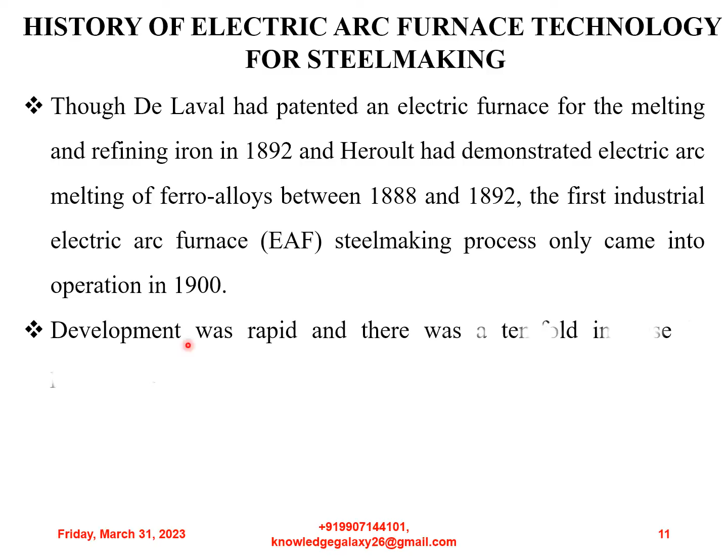Though De Laval had patented an electric furnace for melting and refining iron in 1892, and Heroult had demonstrated electric arc melting of ferroalloys between 1888 and 1892, the first industrial electric arc furnace, that is EAF, steel making process only came into operation in 1900. Development was rapid, and there was a tenfold increase in production from 1910 to 1920, with over 500,000 tons being produced in 1920, though this still represented only a very small proportion of the global steel production at that time.

Initially, EAF steelmaking was developed for producing special grades of steels using solid forms of feed such as scrap and ferroalloys. Solid materials were firstly melted through direct arc melting, refined through the addition of appropriate fluxes, and tapped for further processing.

Till the late 20th century, tap-to-tap times over 3 hours were common, and power usage was frequently well over 600 kilowatt-hour per ton, nearly twice the thermodynamic requirement. For much of the 20th century, EAF steelmaking was viewed as an expensive and slow process only suitable for high-value steels.

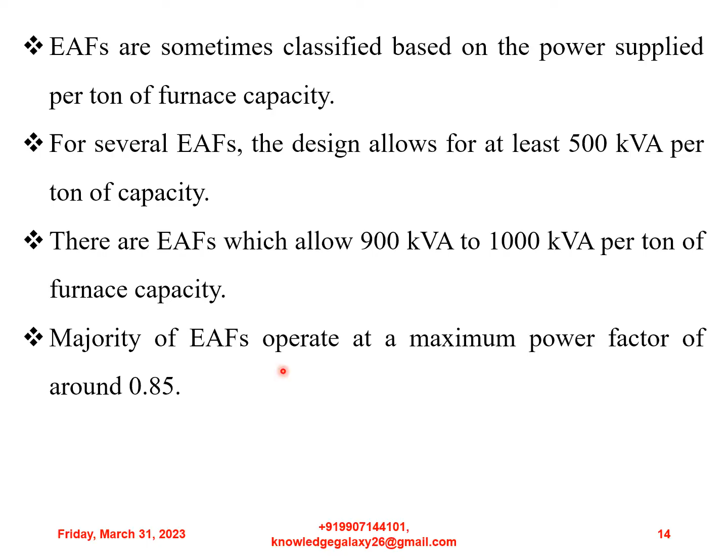So again, let's move on. EAFs are sometimes classified based on the power supplied per ton of furnace capacity. For several EAFs, the design allows for at least 500 kVA per ton of capacity. There are EAFs which allow 900 kVA to 1000 kVA per ton of furnace capacity. Majority of EAFs operate at a maximum power factor of around 0.85. Hence, the transformer ratings correspond to a maximum power input of around 0.75 to 0.85 megawatt per ton of furnace capacity.

The emerging new technology of EAF started in the beginning of the 20th century when wide-ranging generation of relatively cheap electric energy started at that time. First generation electric arc furnaces had a capacity between 1 ton and 15 tons only. Initially, the EAF had Bessemer or Thomas converters and Siemens Martin furnaces as strong competitors, but its niche was the production of special steels needing high temperature, ferroalloy melting, and long refining times.

Initially, for the bulk production of plain carbon steels, open hearth furnaces were less expensive because of their large size as well as the higher cost of electricity.

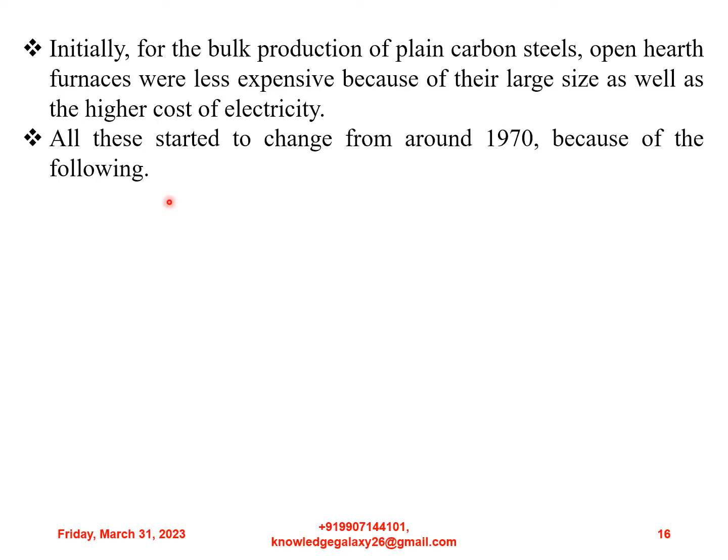All these started to change from around 1970 because of the following. First, while the cost of liquid fuels started increasing, electricity generation costs became lower and electricity became comparatively cheaper. Next, larger and higher power EAFs could be installed because of progress in electrical engineering and control systems.

Next, EAF steelmaking is intrinsically cleaner than open hearth steelmaking. Since EAF steelmaking is predominantly scrap-based, smaller plants with lower capital investments and faster attainment of rated capacity could be set up even compared to BF/BOF based plants—BF being blast furnace and BOF being basic oxygen furnace based plants. Therefore, electric arc furnaces started gradually replacing basic open hearths for producing plain carbon steels as well.

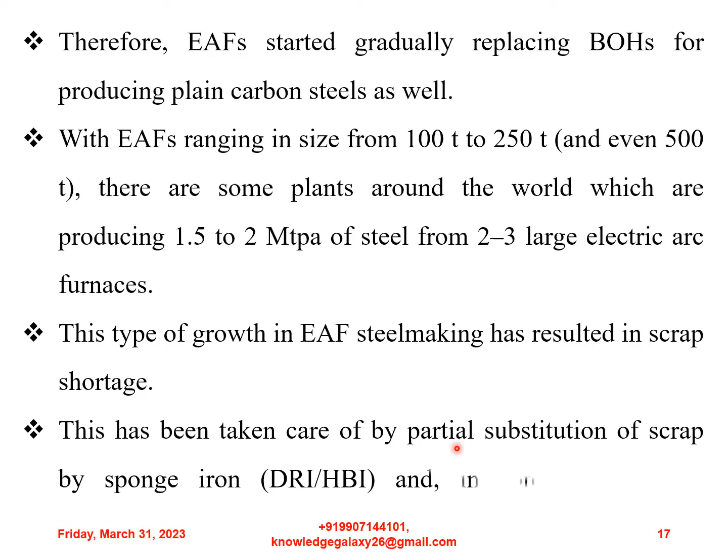With electric arc furnaces ranging in size from 100 ton to 250 ton and even 500 ton capacity, there are some plants around the world producing 1.5 to 2 million tons per annum of steel from 2 to 3 large electric arc furnaces. This type of growth in electric arc furnace steelmaking has resulted in scrap shortage. This has been taken care of by partial substitution of scrap by sponge iron, that is DRI or HBI—DRI being directly reduced iron and HBI being hot briquetted iron—and in some plants with additional charging of cold pig and hot metal.

Electric arc furnace based operations have gradually moved into production of steels which were traditionally made through the integrated route. The first of these areas was long products, that is reinforcement bars, merchant bars and wire rods. In the 1960s, with the advent of billet casting, the electric arc furnace occupied a new niche and became the melting unit of choice for the so-called mini mills, feeding billet casting machines for the production of long products.

This was followed by advances into heavy structural and plate products, and by 1985 a new niche for electric steelmaking began to be taken to the flat products area with the advancement of thin slab casting and direct rolling process.

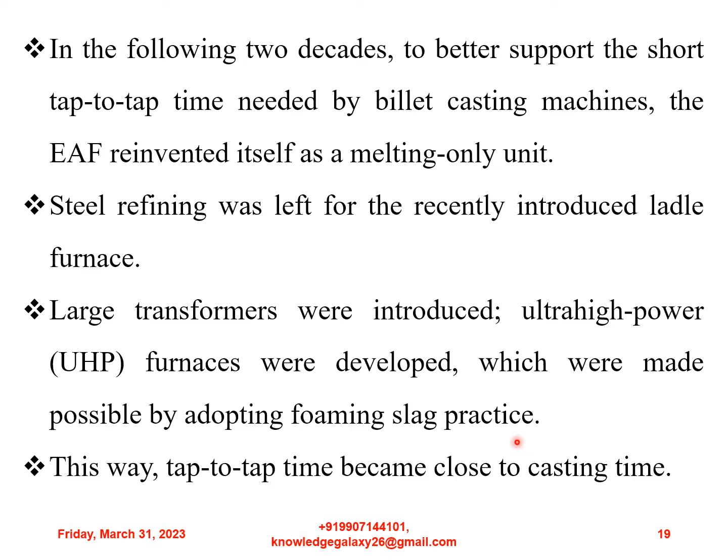In the following two decades, to better support the short tap-to-tap time needed by billet casting machines, the electric arc furnace reinvented itself as a melting-only unit. Steel refining was left for the recently introduced ladle furnace. Large transformers were introduced. Ultra-high power, that is UHP furnaces, were developed, which were made possible by adopting foaming slag practice. This way, tap-to-tap time became close to casting time.

Since the 1960s, the technology has undergone rapid development, moving from a boutique technology to the second largest steelmaking technology behind basic oxygen steelmaking, that is BOS technology. Since the late 20th century, production of steel by the electric arc furnace has grown considerably. There have been several reasons for this, but primarily they relate back to product cost and advances in technology.

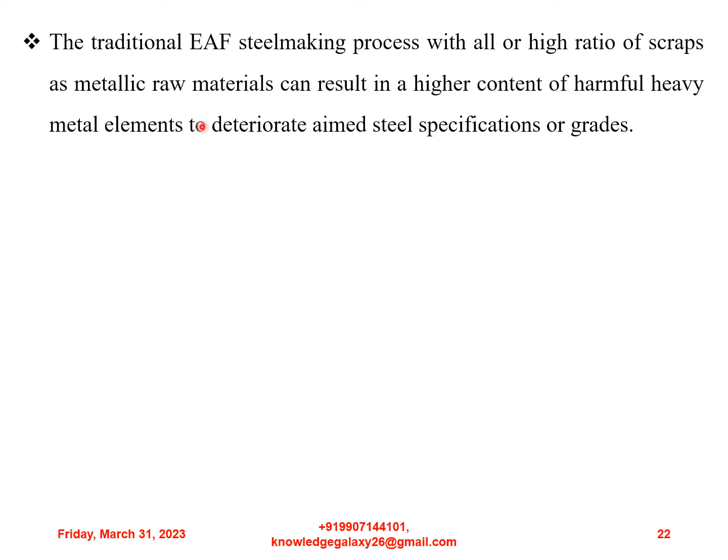Moving on, the traditional electric arc furnace steelmaking process with all or high ratio of scraps as metallic raw materials can result in a higher content of harmful heavy metal elements, deteriorating aimed steel specifications or grades.

Hence, the normal flow chart and organization of electric arc furnace steelmaking can be disturbed by charging excessive scraps with complex chemical compositions. It has been widely proposed that one of the effective measures to avoid and solve this problem is to increase hot metal charge ratio.

However, excessive charging of hot metal can lead to prolonging the tap-to-tap time of the electric arc furnace steelmaking process, since large carbon load from the excessively charged hot metal can overburden the decarbonization operation during the process.

As electric arc furnace steelmaking attempts to further displace steelmaking through the integrated route, several issues come into play, such as residual levels in the steel—essentially elements contained in the steel which are not removed during melting or refining—and dissolved gases, namely nitrogen, hydrogen, and oxygen in the steel. Both of these have a large effect on the quality of the steel and are to be controlled carefully if electric arc furnace steelmaking is to compete for the production of higher quality steels.

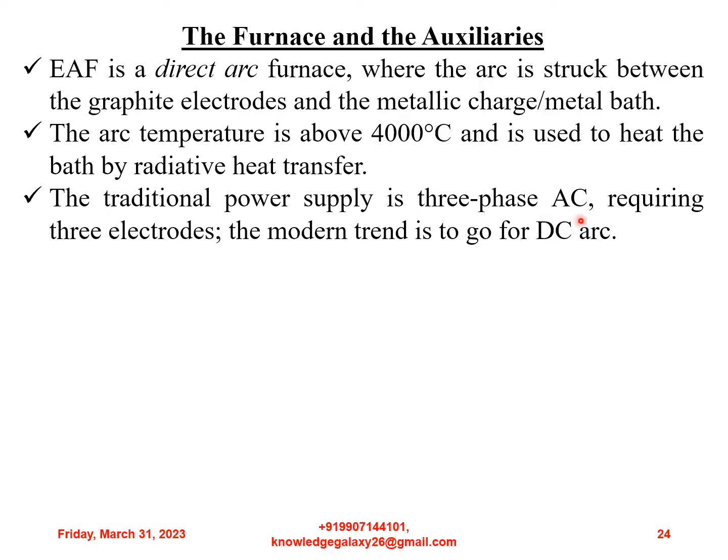Electric arc furnace is a direct arc furnace where the arc is struck between the graphite electrodes and the metallic charge or metal bath. The arc temperature is above 4000 degrees Celsius and is used to heat the bath by radiative heat transfer. The traditional power supply is three-phase AC requiring three electrodes. The modern trend is to go for DC arc.

The figure in the next slide depicts the typical cross section of a conventional electric arc furnace. So you can observe that picture.

Basic type electric arc furnaces are employed for steel making. Hence the inner lining of the hearth in such furnaces is burnt magnesite. Charging is done from the top, and during charging the electrodes are lifted up to allow the roof to be swung horizontally to one side, thus providing open access from the furnace top.

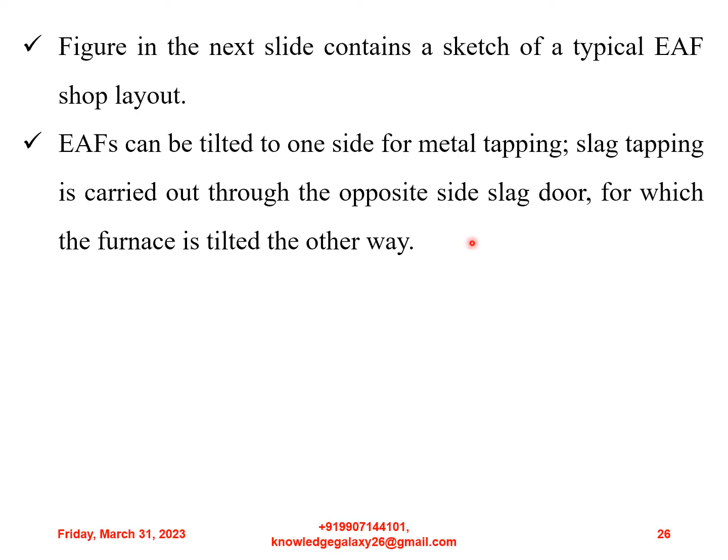I hope you have observed the cross section of an electric arc furnace shown in the previous slide. So now let's move on. The next slide contains a sketch of a typical electric arc furnace shop layout. Electric arc furnaces can be tilted to one side for metal tapping, and slag tapping is carried out through the opposite side slag door, for which the furnace is tilted the other way.

The electrodes get worn out and consumed during arcing, and before the length of an electrode becomes too small for operation, another electrode is joined to it at the top. In order to do this, each electrode has internal threading at the ends, and the threaded ends of the two electrodes are connected by a threaded graphite nipple.

Now let me describe the whole layout in detail. The furnace unit itself includes the following parts. First, furnace body consisting of the shell, the hearth, the walls, the spout, doors, etc. Next is gears for furnace body movement. Next comes arrangement for moving the roof. Next is electrodes with their holders and supports. Electrode lifting and lowering mechanism. Next is electrical equipments, that is transformer, cables, electrode control arrangements, etc.

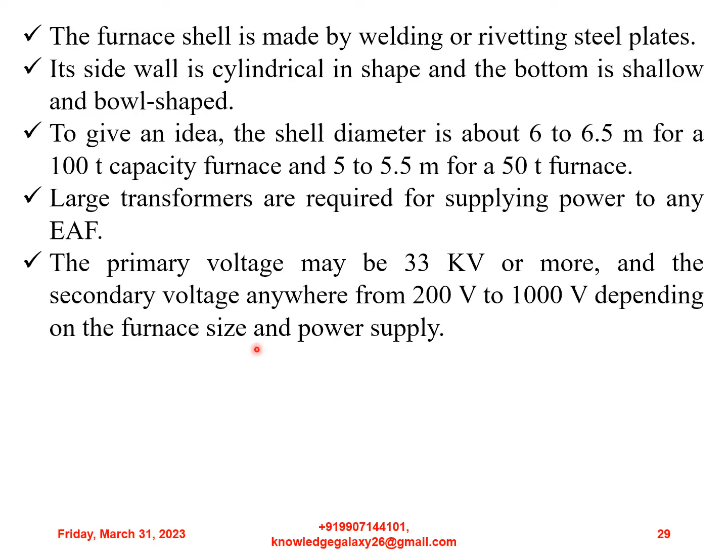Next, moving on. Let us keep the momentum going and continue the presentation, and discuss the conventional electric arc furnace steel making practice, how steel was made conventionally in electric arc furnace. As mentioned already, the process of electric arc furnace steel making is about 100 years old. Through decades of efforts till 1970, electric furnace steelmaking practice got significantly standardized.

This is what is denoted by the term conventional. It is practiced even now in smaller and relatively older units. Electric arc furnace steel making involves most of the stages in heat making in basic open hearth furnaces with the exception of the following. Hot metal is not used in conventional practice, my dear friends. I repeat, hot metal is not used in conventional practice.

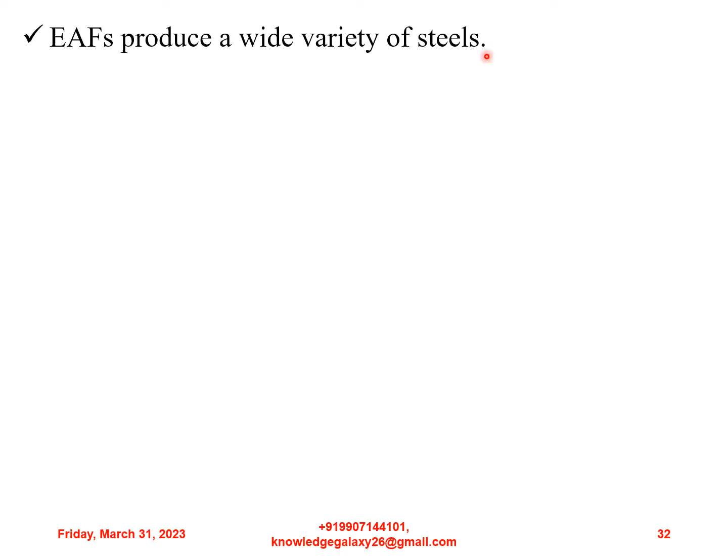Electric arc furnaces produce a wide variety of steels. Depending on the type of solid metallic charge and the grade of steel to be produced, the refining practice differs considerably. The type of refining employed may be broadly classified into the following.

First, oxidizing single slag practice. It is employed to produce tonnage grades of carbon and low alloy steels, as well as non-deoxidized, semi-deoxidized and deoxidized steels. The physical and chemical specifications are not very stringent, that is, the quality of steel is similar to what is attainable in open hearths using a basic oxidizing slag as the medium of refining.

Next comes double slag practice. In this case, after refining using an oxidizing slag, further refining is carried out under a reducing slag. So, double slag practice: after refining using an oxidizing slag, further refining is carried out under a reducing slag.

The reducing slag allows attainment of lower sulfur levels and also assists in higher alloy recovery after tapping. In this practice, the original oxidizing slag can be modified by the addition of reducing agents. However, it gives rise to danger of reversion of phosphorus from the slag back to metal.

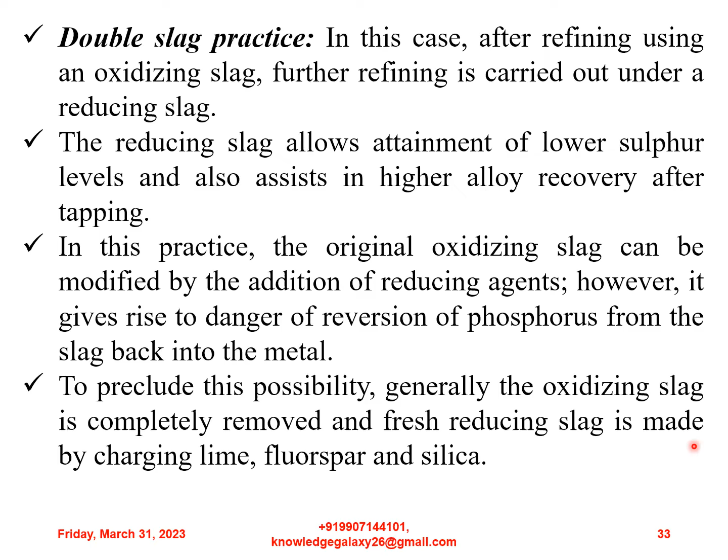To preclude this possibility, generally the oxidizing slag is completely removed and fresh reducing slag is made by charging lime, fluorspar and silica.

The reducing agent may be graphite or coke breeze. This type of slag is commonly referred to as carbide slag, since the carbon added reacts with CaO to form some amount of CaC2.

Carbide slags do not allow very low carbon contents to be attained in the bath. In such cases, ferrosilicon is used as the reducing agent instead of carbon.

At this stage, it is worth noting some salient differences in the metallurgical features of basic open hearth and electric arc furnace steelmaking. These are noted below.

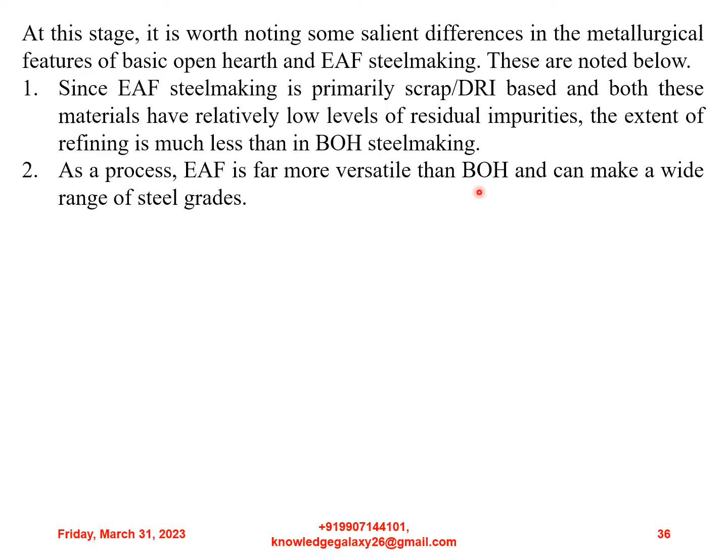First, since electric arc furnace steelmaking is primarily scrap or DRI based, and both these materials have relatively low levels of residual impurities, the extent of refining is much less than in basic open hearth steelmaking. As a process, electric arc furnace is far more versatile than basic open hearth and can make a wide range of steel grades.

Sorting out of scrap and choosing the proper scrap grade are important for electric arc furnace steel making. This is the heart of the steel making operation via electric arc furnace, since the extent of refining has to be managed accordingly. For this purpose, scrap may be classified into the following categories.

First is scrap containing elements that cannot be removed by oxidation during refining, such as copper, nickel, stannum, molybdenum, tungsten, etc. Next category is scrap containing partially oxidizable elements such as phosphorus, manganese, chromium, etc.

Next category is scrap containing completely oxidizable elements such as aluminium, silicon, titanium, vanadium, zirconium, etc. Next category is scraps containing volatile elements such as zinc, cadmium, plumbum, etc.

Now, scrap of type B and C can be tackled easily during refining, and type D scrap would require some special attention. However, type A scrap gives rise to problems like undesirable residuals in the final steel.

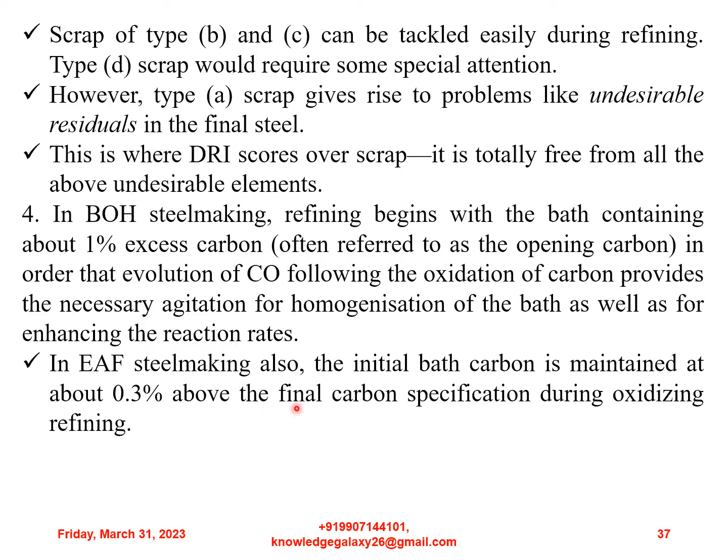In electric arc furnace steel making also, the initial bath carbon is maintained at about 0.3% above the final carbon specification during oxidizing refining. However, stirring is absent during refining under a reducing slag, and some other stirring technique, use of mechanical stirrers called rabbles, is required.

Now let us discuss about the advances in electric arc furnace steel making. Advances are the developments which have been done in the electric arc furnace steel making technology. So let us describe all of them in detail.

There have been several advances in electric arc furnace technology which have allowed the electric arc furnace to compete successfully with the integrated production route. Majority of these have dealt with increases in productivity leading to lower cost of steel production.

Present day electric arc furnaces can produce any type of steel grades which include the general purpose construction steel grade, the titanium niobium ultra low carbon steel for automotive body parts having a carbon specification of less than 0.0035% in order to optimize formability, the line pipe steel for gas distribution, which is a very demanding grade as the combination of high strength and high fracture toughness demands extremely low levels of impurities like phosphorus, sulfur, hydrogen, oxygen and nitrogen.

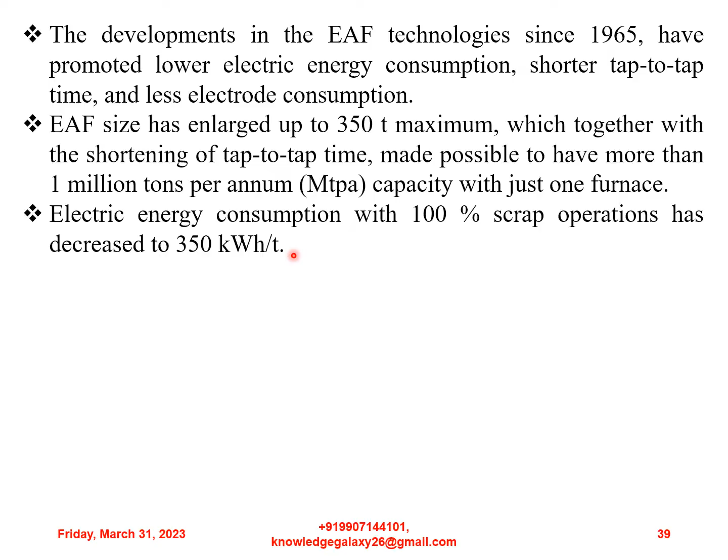Electric energy consumption with 100% scrap operations has decreased to 350 kWh per ton. Chemical energy increased at levels not far from those of basic oxygen steelmaking processes. Refractory consumption has fallen down because of the replacement by cooled roof and panels, foaming slag, and refractory quality improvement.

Power off time is now less than 10 minutes for the best operated furnaces. For a large number of electric arc furnaces, average electrode consumption is around 1.43 kilograms per ton.

The present day ultra high power electric arc furnace has several sub-processes which have contributed to its remarkable productivity and efficiency. The phenomena which occur in the furnace include: first, heating of the scrap by the oxy-fuel burners, melting of the scrap by the electric arcs, liquid slag formation.

Next comes oxygen and carbon injection for foaming of the slag. Next, movement of the scrap pieces during melting. Sixth one is oxygen lancing for scrap cutting and decarburization. Seventh is chemical reactions between slag and metal. And eighth one is post combustion of the CO, carbon monoxide, evolved from the reactions.

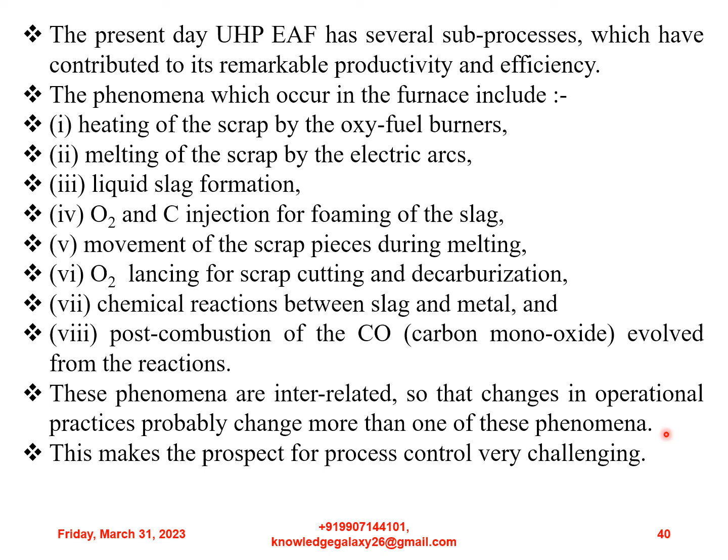These phenomena are interrelated, so that changes in operational practices probably change more than one of these phenomena. This makes the prospect for process control very challenging.

The shift towards electric arc furnace steel making has been accompanied by technical advances which have allowed large decreases in power requirements and increased productivity. Some of the major technical advances are: first, foaming slag practice, in which a foaming slag is used to bury the arc and reduce refractory damage and heat loss from the arc region.

Next is hot heel operation, in which liquid steel is left in the bottom of the furnace to assist in the melting of fresh solid feed entering the furnace.

Next is post combustion, in which CO generated during decarburization is burned through oxygen injection from lances inside the furnace, and the energy liberated is used either in heating the bath directly or preheating the incoming feed materials.

Fourth one is oxy-fuel burners, in which auxiliary burners are used to improve melting rates and to provide more even heat distribution throughout the furnace.

Fifth is preheating of scrap, in which a number of scrap preheating systems utilizing the heat associated with the exhaust gases have been developed, some based on batch bucket systems and others on continuous shaft systems.

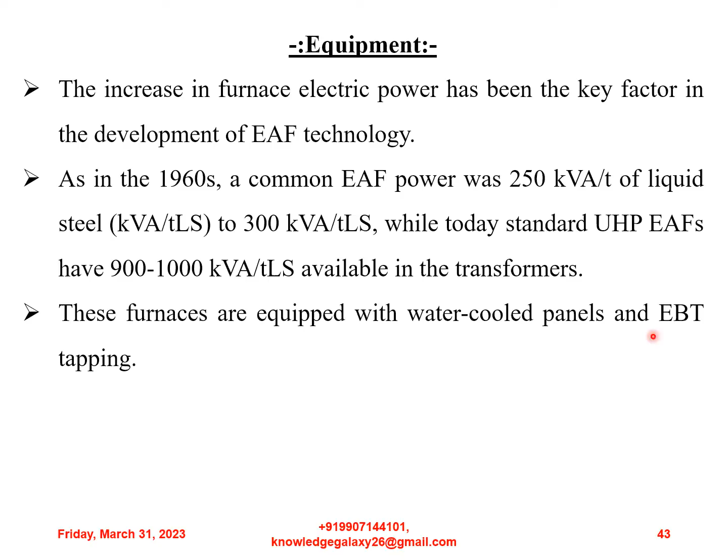These furnaces are equipped with water-cooled panels and EBT tapping. EBT is eccentric bottom tapping, which I will be discussing later. EBT stands for eccentric bottom tapping, a system of tapping which yields a uniform steel jet falling into the ladle with slag carryover controlled to a certain extent.

The present day electric arc furnace includes three water-cooled parts: roof, panels, and the exhaust gas duct. Although some heat is lost due to heat extraction by the cooling water, this design allows for less refractory consumption, since they replace refractory linings, and enables the use of high power.

At the time the panels were first introduced, some fears arose on safety risks, but after realizing the cost advantages, almost all electric arc furnaces adopted them. The panels can be made of steel or copper, which have much longer life, and with different designs like conventional, flip and turn, etc.

Recently, more attention has been paid to safety with water cooling: firstly, to detect, limit and avoid the possibility of water leakage, and secondly, to cut the need of repairing work in the hot furnace. Exhaust gas analysis, when hydrogen is included, is a useful tool to detect leakage.

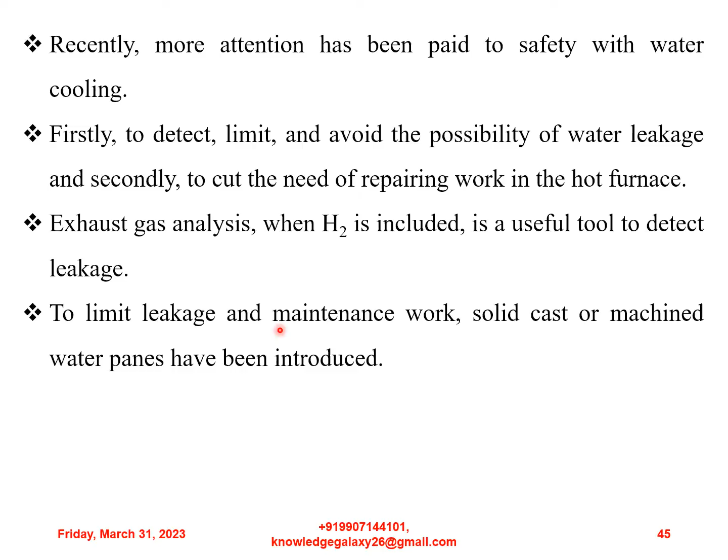To limit leakage and maintenance work, solid cast or machined water pans have been introduced. Split shell with spray-cooled upper shell means less risk, as non-pressurized water tends to penetrate less in case of leakage.

Today, electric arc furnace process is an essential part of steel making. Melting is the main task of the electric arc furnace process, and it is accomplished by energy supply which includes both electric power and chemical energy. The electric power is supplied by the graphite electrodes, which is the main energy supplier. Chemical energy is supplied through several sources, mainly including oxy-fuel burners and oxygen injection.

At first glance, the basic processes of the electric arc furnace appear quite straightforward, consisting of simply providing enough electrical energy to heat and melt the steel scrap.

However, the whole process takes place under conditions of extreme temperature, which complicate maintenance of the furnace and the correction of any problems. For example, to preserve the refractory lining in the furnace, water cooling panels are built into the furnace walls. Without careful control, these can overheat and the process temperature has to be adjusted accordingly.

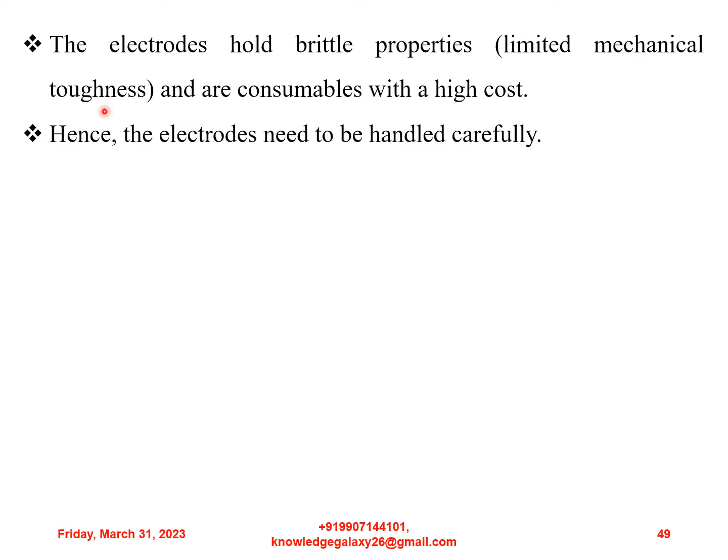The electrodes hold brittle properties, that is limited mechanical toughness, and are consumables with a high cost. Hence, the electrodes need to be handled very carefully.

If the furnace is filled with an excessive amount of coarse scrap, the electrodes need to be lowered very carefully in order to avoid expensive breakages. The electrodes progressively wear during heating and melting, and measures have to be taken to avoid shock to the electrodes.

These are examples of some of the several events which can arise during the electric arc furnace process. I hope everything so far is clear to you all.

Moving on, conventional electric arc furnaces today have 30 to 50% of their energy requirements met by chemical energy, and it appears that scrap melting is rather flexible in respect to where the energy comes from.

This is a distinct advantage of electric arc furnace steel making for several reasons. This has led equipment manufacturers to develop a number of new furnaces which have improved energy efficiency and/or flexibility.

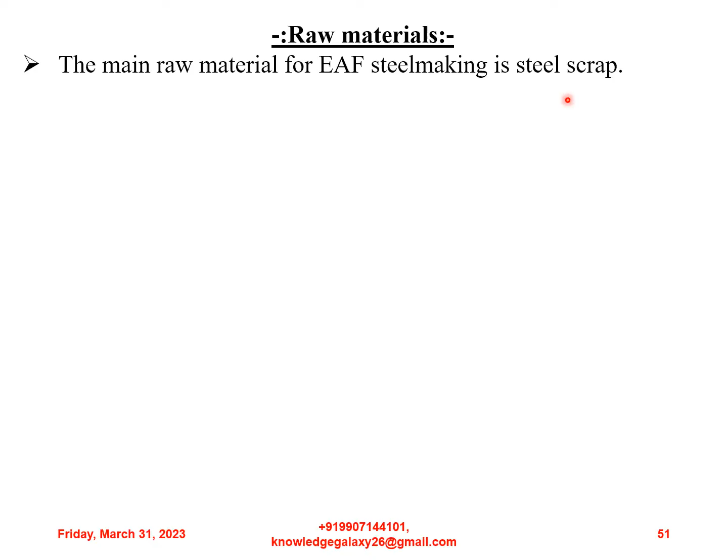Now let us discuss the raw materials used in electric arc furnace steel making technology. The main raw material for electric arc furnace steel making is steel scrap. Today, the electric arc furnace is the most common way to recycle steel from scrap.

There is a broad variety of steel scrap, both in terms of composition, from plain carbon steels through to highly alloyed tool steels, and geometry, from finely shredded sheet through to large beams. By melting the scraps in the electric arc furnace with the help of electrodes and an electric current, new functional steel can be produced from old products.

Instead of deploying ore-based raw material resources, basic steel elements and valuable alloy steels can be reused, which is beneficial from both an economic and environmental point of view.

Scrap is energy intensive and a valuable commodity, coming primarily from three main sources: first, reclaimed or obsolete scrap, obtained from old cars, demolished buildings, discarded machinery, and domestic objects. Second, industrial or prompt scrap. Third, revert scrap, also known as internal or home scrap, generated within steel making and forming processes, such as crop ends from rolling operations and metallic losses in slag.

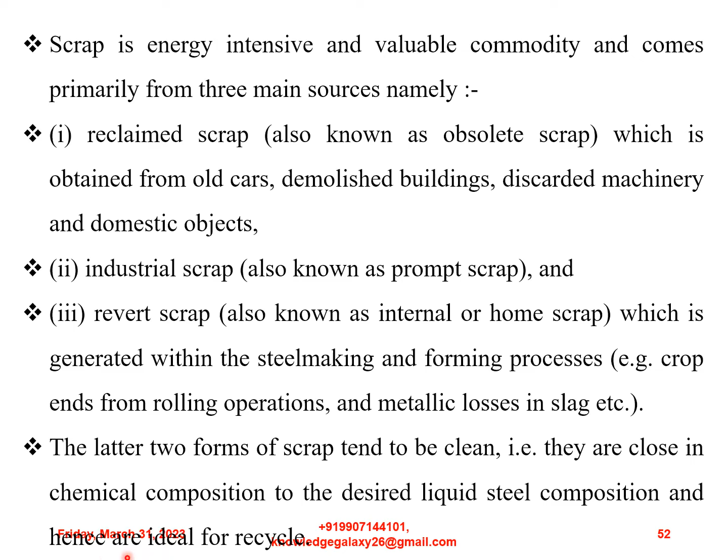The latter two forms of scrap tend to be clean, that is, close in chemical composition to the desired liquid steel composition, and hence are ideal for recycling.

Reclaimed or obsolete scrap frequently has a quite variable composition and often contains contaminants undesirable for steel making. Levels of residual elements such as chromium, molybdenum, copper, stannum, and nickel are high in obsolete scrap and can affect casting operations and product quality if not diluted.

Hence, a production shop needing very low residual levels in steel is forced to use higher quality prompt scrap, but at much higher cost. The alternative is to use a combination of contaminated obsolete scrap along with what are normally referred to as clean iron units or virgin iron units.

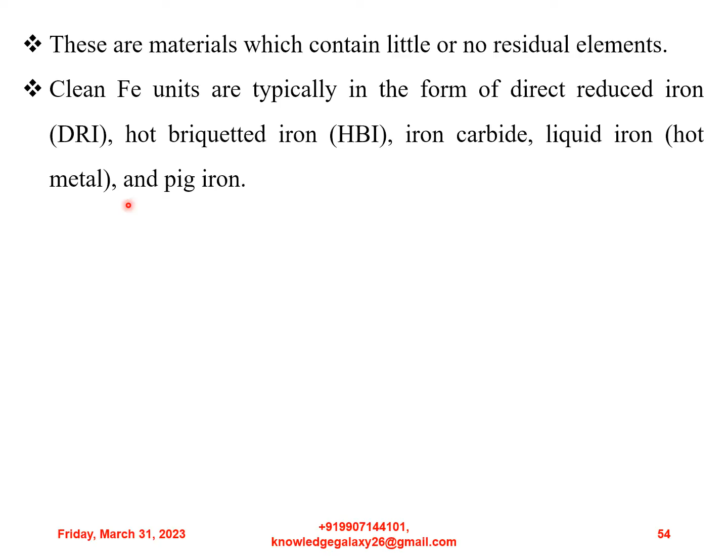These are materials which contain little or no residual elements. Clean iron units are typically in the form of direct reduced iron (DRI), hot briquetted iron (HBI), iron carbide, liquid iron, hot metal, and pig iron. It is possible to use lower grade scrap containing residual elements if it is blended with clean iron units so that the resulting residual levels in the steel after melting meet requirements for flat rolled products.

Obsolete scrap is much more readily available than prompt scrap, and hence the demand for clean iron units is always there.

There are electric arc furnaces in which 100% steel scrap is the most common charge. The situation is not the same in all electric arc furnaces, in which alternative materials like DRI, HBI, hot metal and pig iron take part in the charge. Worldwide, scrap covers around 75% of the metallics for electric arc furnaces, while DRI and HBI cover around 15%, and the balance is covered by hot metal and pig iron.

It is well known that DRI melting consumes more electric energy than scrap. This is an important aspect. This has to do with the presence of acid gangue in the iron ore, which carries into the DRI and then has to be neutralized by lime addition, resulting in an increased amount of slag compared with conventional melting of scrap.

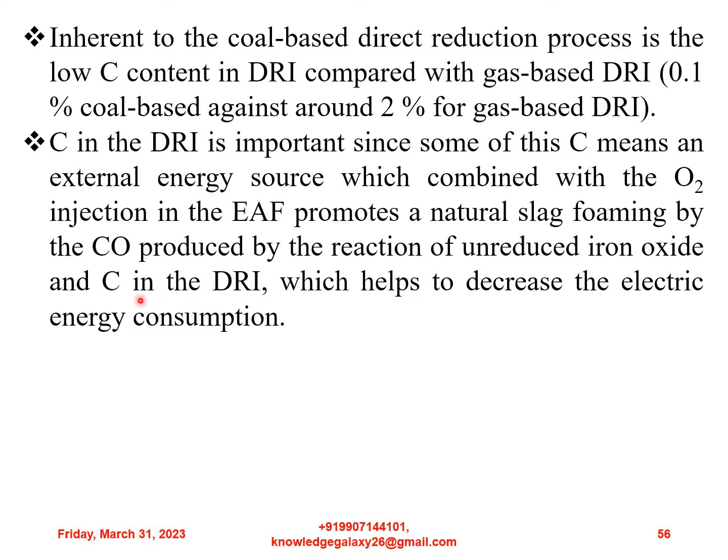Inherent to the coal-based direct reduction process is the low carbon content in DRI compared with gas-based DRI: about 0.1% for coal-based against around 2% for gas-based DRI. Carbon in the DRI is important since this carbon acts as an external energy source, which combined with oxygen injection in the electric arc furnace promotes natural slag foaming by the CO produced from the reaction of unreduced iron oxide and carbon in the DRI, helping to decrease electric energy consumption.

In electric arc furnaces where the charge consists of 100% DRI or HBI, charging is done through the fifth hole. Charging a high proportion of hot metal or pig iron in the electric arc furnace is practiced in some electric arc furnaces.

In addition to classification of scrap into the above three groups, scrap is also classified based on its physical size, its source, and the way in which it is prepared. For example, the categories normally used are number 1 bundles, number 1 factory bundles, number 1 shredded, number 1 heavy melt, number 2 heavy melt, number 2 bundles, number 2 shredded, busheling, turnings, shredded auto, structural, plate 1 meter, structural plate 1.5 meter, rail crops, and rail wheels, etc.

In addition to residual elements contained in the scrap, there are also several other undesirable components including oil, grease, paint, coatings, zinc coatings, water, oxidized material and dirt. The lower the grade of scrap, the more likely it is to contain higher quantities of these materials. As a result, this scrap can be cheaper, but the yield of liquid steel can be considerably lower than that achieved when using a higher grade scrap. In addition, these undesirable components can result in higher energy requirements and environmental problems.

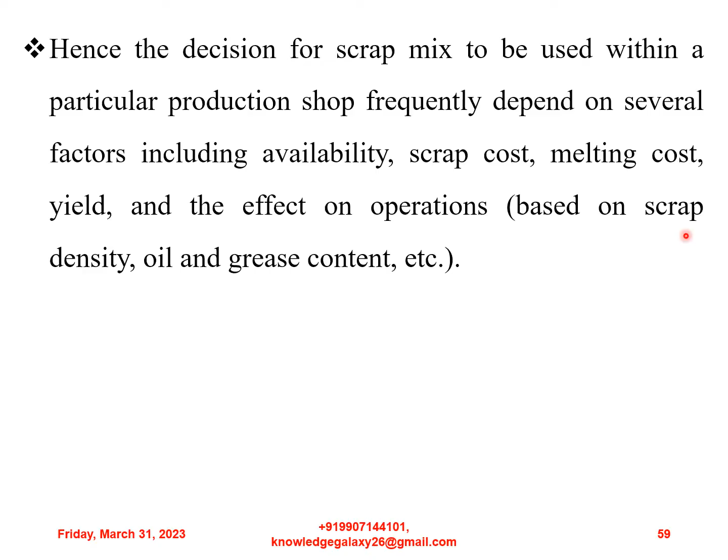Hence, the decision on the scrap mix to be used within a particular production shop frequently depends on several factors including availability, scrap cost, melting cost, yield, and the effect on operations based on scrap density, oil and grease content, etc. In practice, the majority of production shops buy several different types of scrap and blend them to get the most desirable effects for electric arc furnace operations.

Carbon is necessary for the production of steel. Carbon is one of the key elements which give different steel grades their properties. Carbon is also important in steel making refining operations and can contribute a sizable quantity of the energy required during the steel making process.

In basic oxygen steel making processes, carbon is present in the hot metal which is produced in the blast furnace. In electric arc furnace steel making, some carbon is available in the scrap feed, in DRI, HBI or other alternative iron furnace feeds. The quantity of carbon contained in these electric arc furnace feeds is normally considerably lower than that contained in the hot metal, and hence some additional carbon needs to be charged to the electric arc furnace.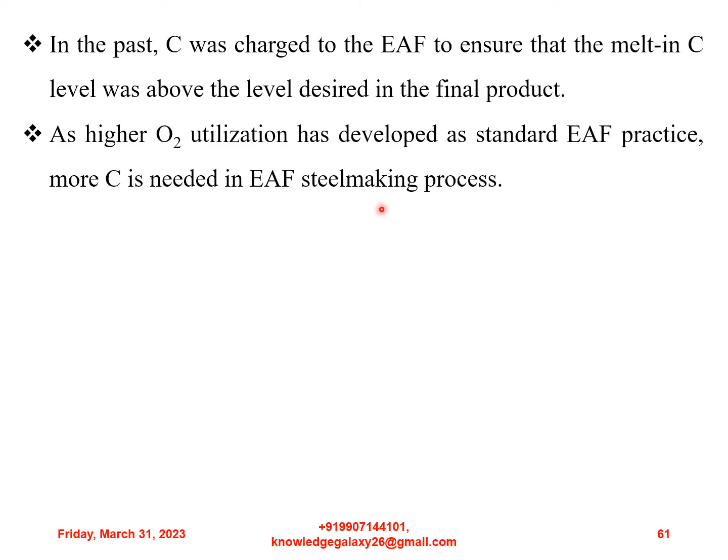In the past, carbon was charged to the electric arc furnace to ensure that the melt-in carbon levels were above the level desired in the final product. As higher oxygen utilization has developed as standard electric arc furnace practice, more carbon is needed in electric arc furnace steel making process. The reaction of carbon with oxygen within the bath to produce CO results in a considerable energy input to the process and has led to substantial reductions in electrical power consumption.

The generation of CO within the bath is also key to achieving low concentrations of dissolved gases, that is nitrogen and hydrogen, in the steel, as these are flushed out with the CO. In addition, oxide inclusions are flushed from the steel into the slag.

In oxygen injection operations, some iron is oxidized to FeO, that is ferrous oxide, and goes to the slag. Oxy-fuel burner operations also result in some scrap oxidation, and this also goes to the slag once the scrap melts in. Dissolved carbon in the steel reacts with FeO at the slag or bath interface to produce CO and recover iron units to the bath.

The quantity of charged carbon needed is dependent on several factors, which includes: first, carbon content of scrap feed; next, projected oxygen consumption; next, desired carbon at tapping; and fourth, the economics of iron yield compared with carbon cost. In general, the quantity needed corresponds to a C by O2 balance, as the furnace operator tries to maximize the iron yield.

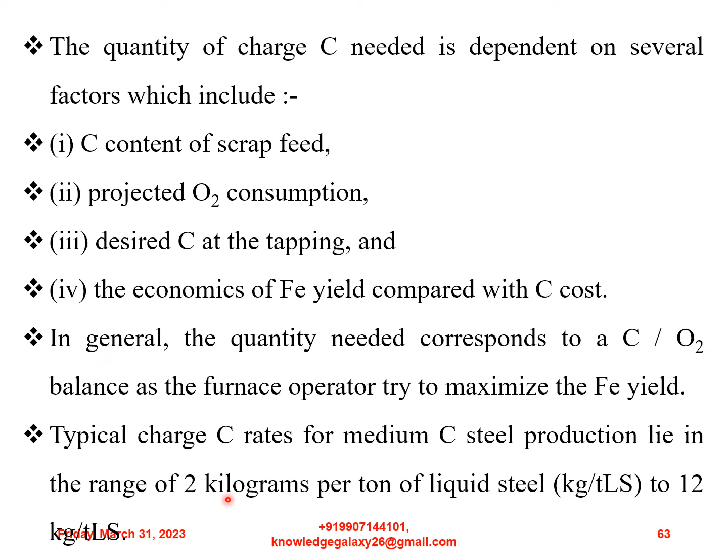The three types of carbonaceous materials which are normally used as charged carbon are: first, anthracite coal; second, metallurgical coke; and third, green petroleum coke.

Anthracite coal typically has moisture content of 3% to 8%, ash content of 11% to 18%, and sulfur content of 0.4% to 0.7%. The high variation in ash content translates into wide variations in fixed carbon content, and hence for use in electric arc furnace, the ash content is to be kept to a minimum. The ash consists primarily of silica, that is SiO2.

Hence, increased ash input to the electric arc furnace needs additional lime addition in order to maintain the desired basicity ratio in the slag. The best grades of anthracite coal have fixed carbon contents of 87 to 89%. Low grade anthracite coals can have fixed carbon levels as low as 50%.

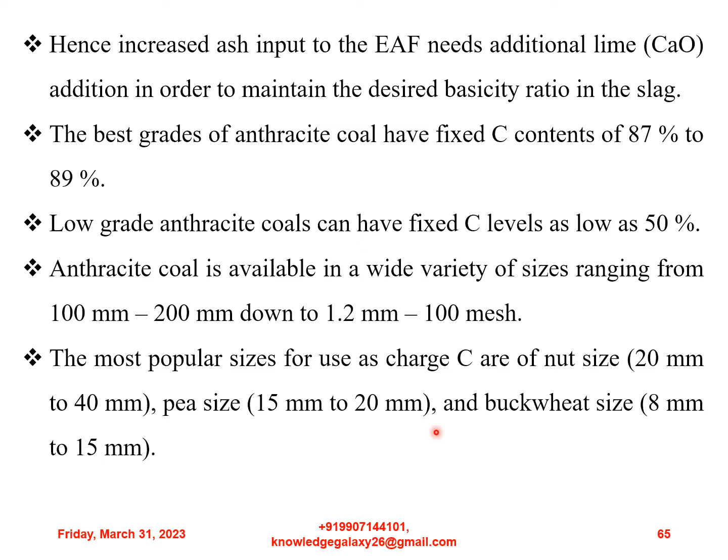Anthracite coal is available in a wide variety of sizes ranging from 100 mm to 200 mm down to 1.2 mm to 100 mesh. The most popular sizes for use as charged carbon are nut size, that is 20 mm to 40 mm, pea size 15 mm to 20 mm, and buckwheat size, that is 8 mm to 15 mm.

Metallurgical coke is produced primarily in integrated steel plants and is used in the blast furnace. However, some coke is used as charged carbon in electric arc furnace. Normally, metallurgical coke has a composition consisting of moisture content 1 to 2%, volatile matters 1 to 2%, ash content 9 to 12%, fixed carbon content 86 to 88%, and sulfur content 0.88 to 1.2%.

Normally, coke breeze with a size of -10 mm is used as charged carbon. Coarser materials can be used but has higher cost.

Green petroleum coke is a byproduct of crude oil processing. Its properties and composition vary considerably and are dependent on the crude oil feedstock from which it is derived. Several coking processes are used in commercial operation and these produce considerably different types of petroleum coke.

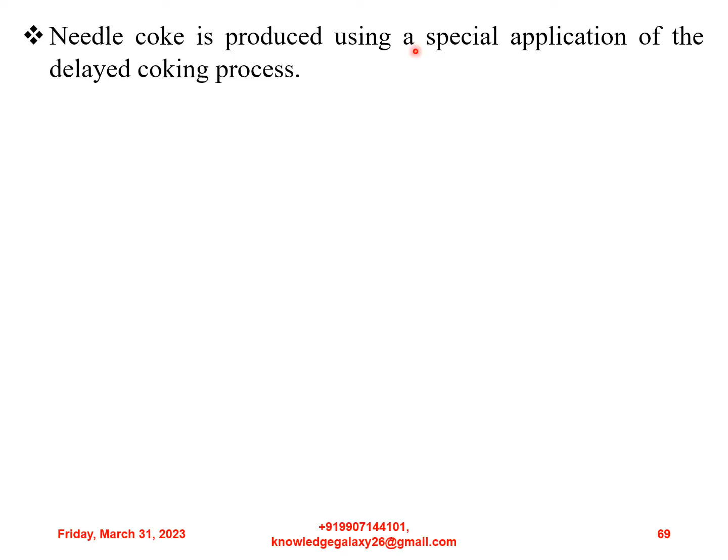Needle coke is produced using a special application of the delayed coking process. It is made from high-grade feedstocks and is the prime ingredient for the production of carbon and graphite electrodes. This material is normally very expensive to be used as charged carbon in electric arc furnaces.

Shot coke is a hard, pebble-like material resulting from delayed coking operation under conditions which minimize coke byproduct generation. It is normally used as a fuel and is cost competitive as charged carbon.

Fluid coke is produced in a fluid coking process by spraying the residue onto hot coke particles. It is normally high in sulfur content and is used in anode baking furnaces. It can also be used as a recarburizer if it is calcined.

So gentlemen, I hope we are going so far so good and moving ahead. Let us now discuss the operation of electric arc furnace.

The electric arc furnace is a batch melting process which produces batches of liquid steel known as heats. The tap-to-tap cycle of the electric arc furnace is made up of several steps consisting of furnace charging, melting, refining, deslagging, tapping, and last but not least, furnace turnaround.

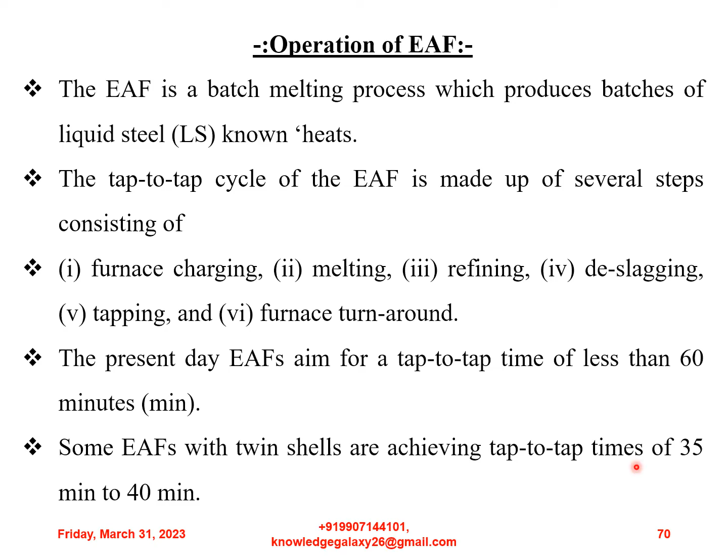The present day electric arc furnaces aim for a tap-to-tap time of less than 60 minutes. Some electric arc furnaces with twin shells are achieving tap-to-tap times of 35 to 40 minutes.

Today, a large number of electric arc furnaces operate with a condition called hot heel, meaning that almost 15% to 20% of metal from the previous heat remains at the bottom of the furnace after tapping. Hot heel increases productivity by allowing use of higher electric power since it decreases the possibility of damaging refractory by powerful arcs, and it also affects the melting rate of the scrap.

Furnace charging: the first step in the production of any heat is to select the grade of steel to be made. Normally, a schedule is developed prior to each production shift. Hence, the operators, normally called the melters, know in advance the schedule for their shift. The scrap yard operator prepares buckets of scrap according to the needs of the electric arc furnace operator.

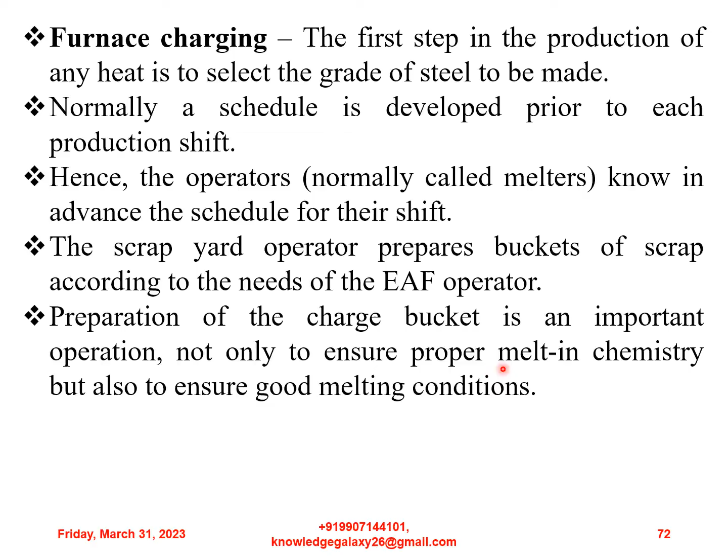Preparation of the charge bucket is an important operation, not only to ensure proper melt-in chemistry but also to ensure good melting conditions. The scrap is to be layered in the bucket according to size and density to promote the rapid formation of a liquid pool of steel in the hearth, while providing protection for the side walls and roof from electric arc radiation.

Other considerations include minimization of scrap cavings, which can break electrodes, and ensuring that large heavy pieces of scrap do not lie directly in front of burner ports, which results in blowback of the flame onto the water-cooled panels. The charge can include lime and carbon, or these can be injected into the furnace during the heat. Many operators add some lime and carbon in the scrap bucket and supplement this with injection.

The first step in any tap-to-tap cycle is charging of the scrap in the electric arc furnace. The roof and electrodes are raised and swung to the side of the furnace to allow the scrap charging crane to move a full bucket of scrap into place over the furnace.

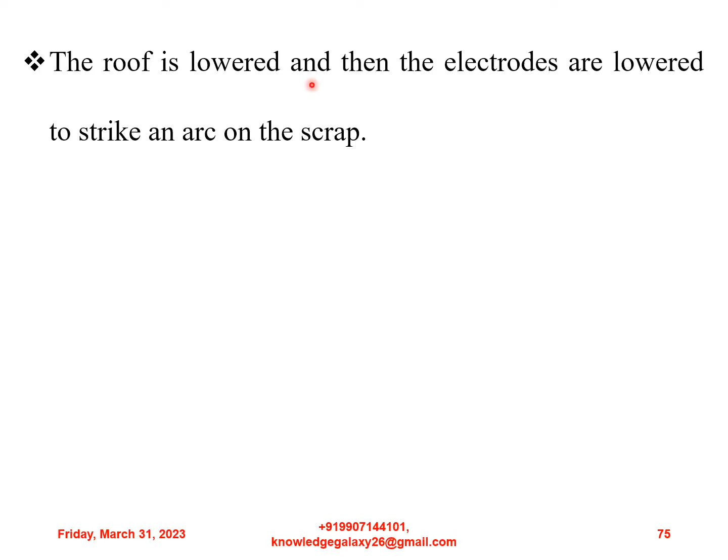The roof is lowered and then the electrodes are lowered to strike an arc on the scrap. This commences the melting portion of the cycle. The number of charge buckets of scrap needed to produce a heat of steel is dependent primarily on the volume of the furnace and the scrap density.

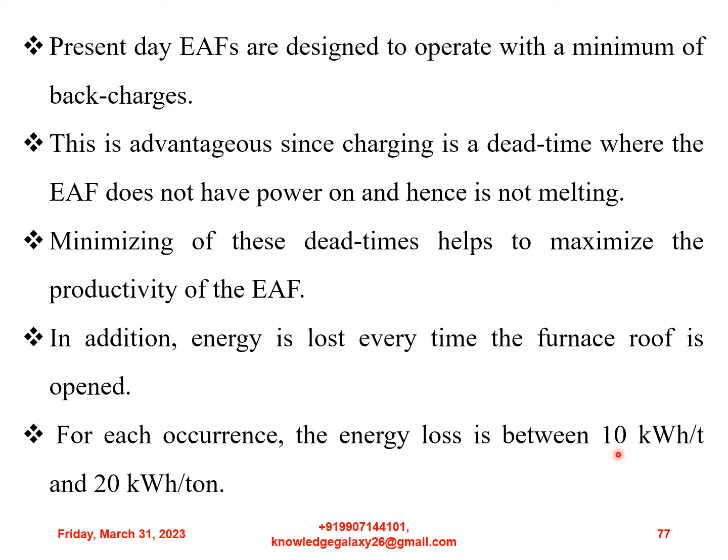In addition, energy is lost every time the furnace roof is opened. For each occurrence, the energy loss is between 10 kWh per ton to 20 kWh per ton. Majority of electric arc furnace operators aim for 2 to 3 buckets of scrap per heat and attempt to blend the scrap for meeting this requirement. Some operations achieve a single bucket charge also. Continuous charging operations such as Consteel and the Fuchs shaft furnace eliminate the charging cycle.

Now let us come to the next step, that is melting. The melting period is the heart of electric arc furnace operations. The electric arc furnace has evolved into highly efficient melting equipment, and present day designs are focused on maximizing the melting capacity of the electric arc furnaces.

The heat needed to melt steel scrap is provided by electric arcs created between the electrodes and the scrap in the furnace. The electrical power of normal electric arc furnaces lies in the range of 50 megawatt to 120 megawatt depending on the size of the furnace. Melting of the scrap occurs at a temperature range of 1500 to 1550 degrees Celsius depending upon the composition of the steel scrap.

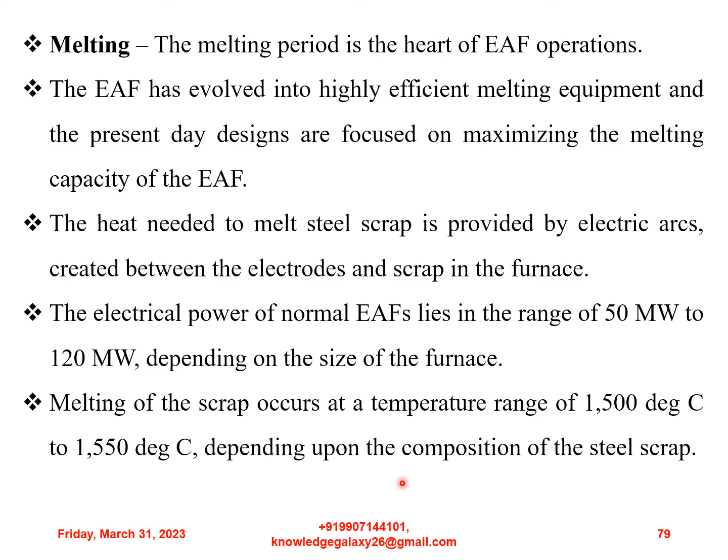Melting is accomplished by supplying energy to the furnace interior. This energy can be electrical or chemical. Electrical energy is supplied through the graphite electrodes and is normally the largest contributor in melting operations.

Initially, an intermediate voltage tap is selected until the electrodes bore into the scrap. For accelerating the boring, normally light scrap is placed on top of the charge. Around 15% of the scrap charge is melted during the initial boring period.

After a few minutes, the electrodes have penetrated the scrap sufficiently so that a long arc high voltage tap can be used without fear of radiation damage to the roof. The long arc maximizes the transfer of power to the scrap, and a liquid pool of metal is formed in the furnace hearth.

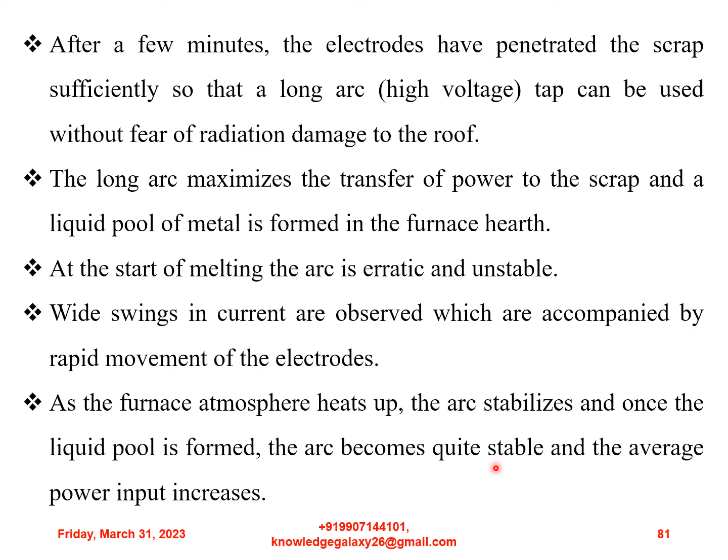At the start of melting, the arc is erratic and unstable. Wide swings in current are observed, which are accompanied by rapid movement of the electrodes. As the furnace atmosphere heats up, the arc stabilizes, and once the liquid pool is formed, the arc becomes quite stable and the average power input increases.

Although ultra-high power furnaces are used, fast melting by using only electric power is difficult and not the most economic practice either. Importing extra energy and assisting melting technique can greatly accelerate scrap melting and bring economic benefits. Accordingly, the present state of the art in electric arc furnace steel making is to use as much as possible chemical energy besides electric energy to accommodate tap to tap times to the pace of the downstream continuous casting process.

Chemical energy is to be supplied through several sources including oxy-fuel burners and oxygen lances. In the oxy-fuel burners, fuel gas is burned using oxygen or a blend of oxygen and air. Heat is transferred to the scrap by flame radiation and convection by the hot products of combustion. Heat is transferred within the scrap by conduction. Large pieces of scrap take longer to melt into the bath than smaller pieces.

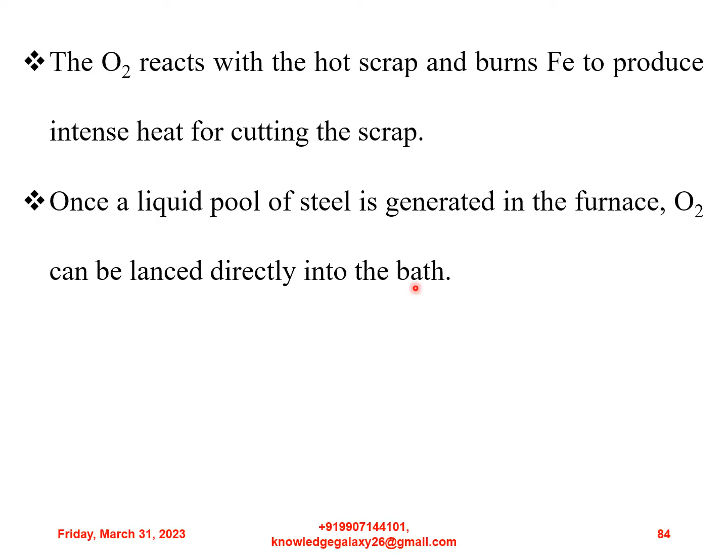Once a liquid pool of steel is generated in the furnace, oxygen can be lanced directly into the bath. This oxygen reacts with several components in the bath which include carbon, iron, aluminium, silicon, manganese and phosphorus. All of these reactions are exothermic in nature, that is, they generate heat and supply additional energy to aid in the melting of the scrap. The metallic oxides which are formed end up in the slag.

The reaction of oxygen with carbon in the bath produces CO, that is carbon monoxide, which either burns in the furnace if there is sufficient oxygen, and or is exhausted through the direct evacuation system where it is burned and conveyed to the pollution control system.

Once enough scrap has been melted to accommodate the second charge, the charging process is repeated. Once the final scrap charge is melted, the furnace sidewalls are exposed to intense radiation from the arc.

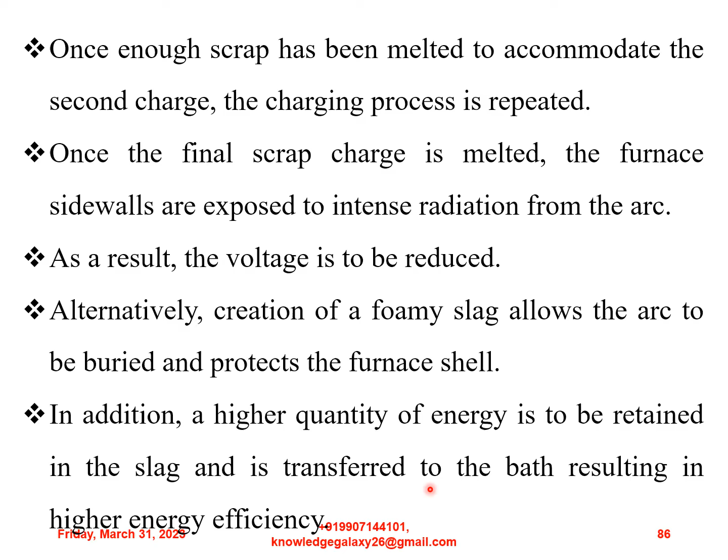As a result, the voltage is to be reduced. Alternatively, creation of a foamy slag allows the arc to be buried and protects the furnace shell. In addition, a higher quantity of energy is retained in the slag and is transferred to the bath, resulting in higher energy efficiency.

One of the most perplexing aspects about scrap is the way it moves during the melting process, and this causes operational problems such as cave-ins in which the scrap suddenly collapses onto the electrodes. These events disrupt the electrical operation, necessitating the rising of the electrodes, or in extreme cases, precipitating breakage of the electrodes.

Further, the solid scrap is introduced into a liquid steel pool when the charge is dropped into the liquid heel, and also when scrap starts to cave in to the pool which is formed by the arcs during the melting process.

Electric arc furnace operators frequently talk about icebergs or steel bergs that form by the bridging of several pieces of scrap, which can take longer to melt than the individual pieces. However, it is difficult to understand the contributing factors to this problem.

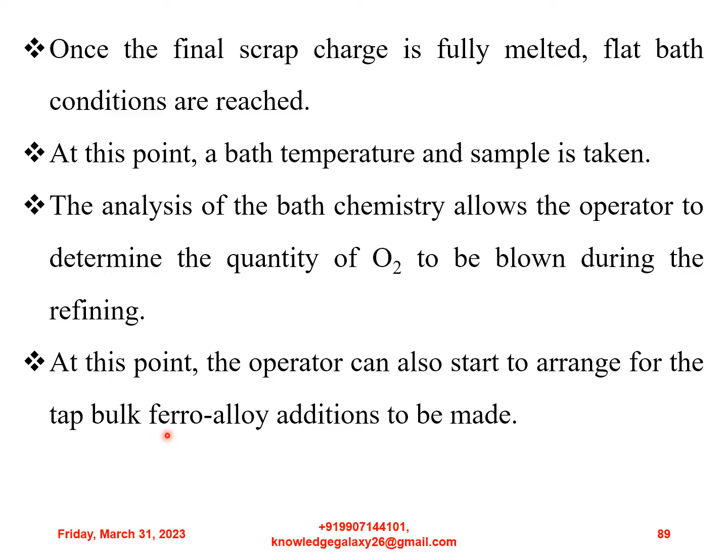Once the final scrap charge is fully melted, flat bath conditions are reached. At this point, a bath temperature and sample is taken. The analysis of the bath chemistry allows the operator to determine the quantity of oxygen to be blown during the refining. At this point, the operator can also start to arrange for the tap bulk ferroalloy additions to be made. These quantities are finalized after the refining period.

Now let us discuss the next step, which is refining. After the scrap has been melted, the temperature is normally increased so that refining reactions can be carried out. Oxygen and carbon can be injected into the steel phase and slag phase respectively. That means oxygen to steel phase and carbon to slag phase.

However, the reactions can also create products which are detrimental to the steel quality and which therefore need to be handled carefully. To do that, a slag is formed with the help of slag forming agents such as lime, calcined dolomite and fluorspar.

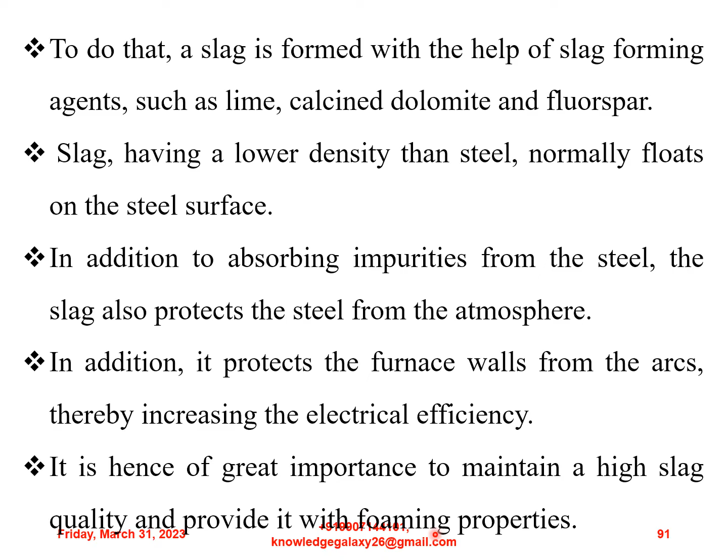Slag, having a lower density than steel, normally floats on the steel surface. In addition to absorbing impurities from the steel, the slag also protects the steel from the atmosphere. So these are the major advantages and functions of slag in steel making. In addition, it protects the furnace walls from the arcs, thereby increasing the electrical efficiency. It is hence of great importance to maintain a high slag quality and provide it with foaming properties.

Slag properties like viscosity, sulfur capacity and phosphorus capacity vary with composition and temperature. One of the main tasks during the refining operation is to maintain adequate slag properties by adding slag forming agents such as lime, calcined dolomite and/or fluorspar.

That is why you might have probably heard that the best steel maker is the best slag maker. So my dear friends, do concentrate on making the best possible slag, then the steel will be made the best.

Moving on, some of the metallic oxides which end up in the slag are acidic in nature. Hence, adding basic slag forming agents helps to keep the basicity of the slag at an appropriate level. High slag basicity, that is high CaO by SiO2 ratio, is also beneficial for the removal of phosphorus, but care is needed not to saturate the slag with CaO, as this leads to an increase in slag viscosity which makes the slag less effective.

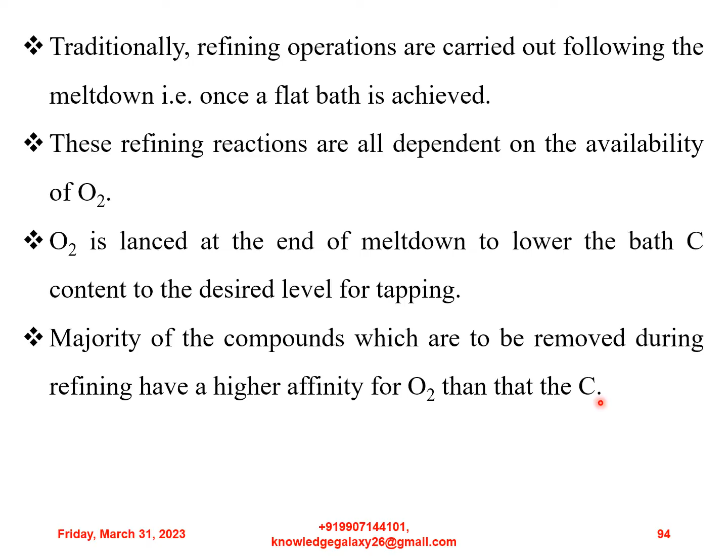Majority of the compounds which are to be removed during refining have a higher affinity for oxygen than that for the carbon. Hence, the oxygen preferentially reacts with these elements to form oxides which float out of the steel and into the slag.

Decarburization is carried out as a refining task. If the charge is 100% scrap, carbon in the metallic charge is relatively low. This is not the case when charging a high percentage of DRI, if produced in a gas-based unit, HBI, hot metal or pig iron with carbon contents varying between 1.6 to 4.5%.

Normally, due to productivity reasons, electric arc furnace operators prefer to achieve a carbon content of around 0.05% before tapping. Lower contents can imply a too high oxidation level.

An alternative strategy is catch carbon practice, in which carbon content is targeted at somewhat under the final value to be reached with ferroalloy addition. This practice can bring material savings in alloying and deoxidation, but needs strict individual process control for each heat. For this reason, it is not so good for productivity.

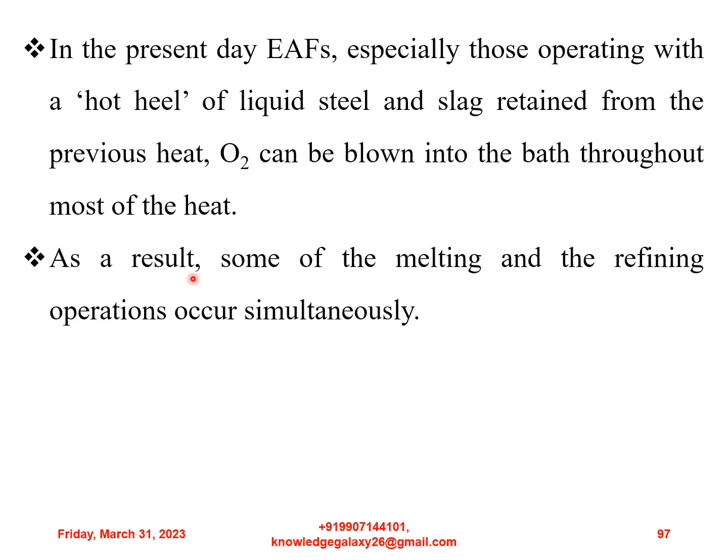In present day electric arc furnaces, especially those operating with a hot heel of liquid steel and slag retained from the previous heat, oxygen can be blown into the bath throughout most of the heat. As a result, some of the melting and refining operations occur simultaneously.

Phosphorus and sulfur normally occur in the electric arc furnace charge in higher concentrations than are normally permitted in steel, and are to be removed.

Unfortunately, the conditions favorable for removing phosphorus are the opposite of those promoting the removal of sulfur. Hence, once these materials are pushed into the slag phase, they can revert back into the steel.

Phosphorus retention in the slag is a function of the bath temperature, the slag basicity, and the FeO levels in the slag. At higher temperatures or low FeO levels, the phosphorus reverts from the slag back into the bath.

My dear friends, this is very important information which is normally asked, and it is expected that a good steelmaker must know why phosphorus reverts to the bath at low temperatures, at higher temperatures, or at low FeO levels, and how and why it reverts. So it is very much necessary to keep this in mind. So I have provided this information. I hope you like it.

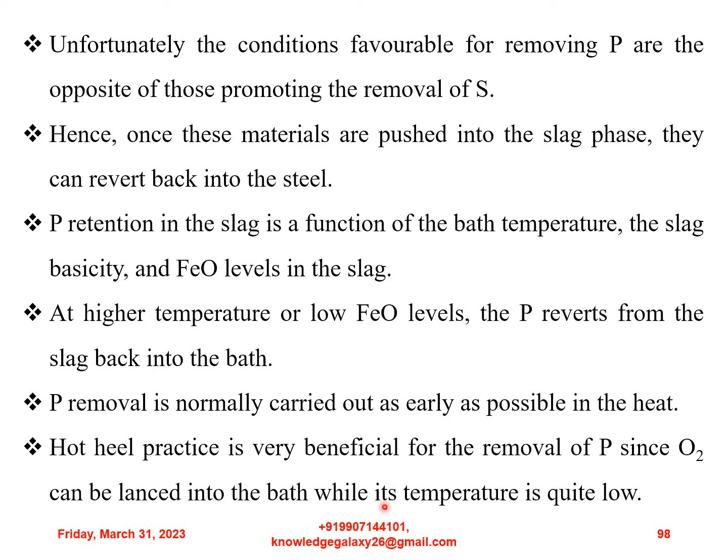Early in the heat, the slag contains high FeO levels carried over from the previous heat, hence aiding in the removal of phosphorus. High slag basicity, that is high CaO content, is also beneficial for phosphorus removal, but care is to be taken not to saturate the slag with CaO, which leads to an increase in slag viscosity and hence makes the slag less effective.

Sometimes fluorspar is added to help fluidize the slag. Stirring up the bath with inert gas is also beneficial, since it renews the slag-metal interface, hence improving the reaction kinetics. In general, if low phosphorus levels are a requirement for a particular steel grade, the scrap is selected to give a low level at melting.

The partition of phosphorus in the slag to phosphorus in the bath ranges from 5 to 15. Normally, phosphorus is reduced by 20% to 50% in the electric arc furnace.

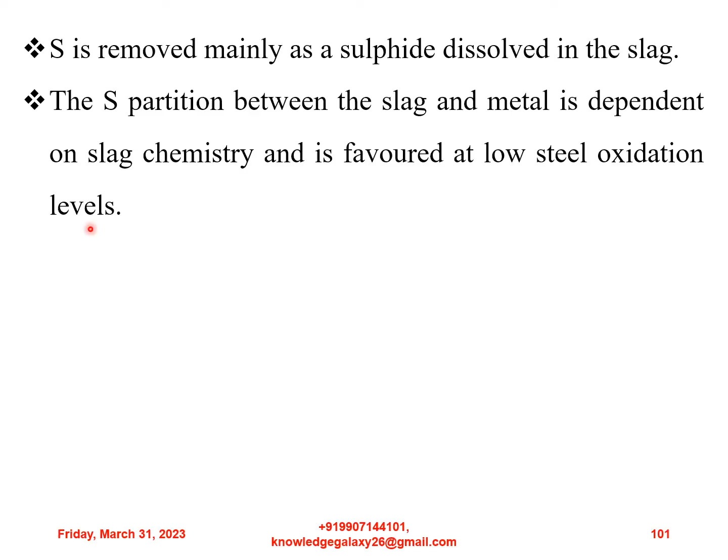Sulfur is removed mainly as a sulfide dissolved in the slag. The sulfur partition between the slag and metal is dependent on slag chemistry and is favored at low steel oxidation levels. Removal of sulfur in the electric arc furnace is difficult, especially in present day practices where the oxidation level of the bath is quite high.

Normally, the partition ratio is between 3 and 5 for electric arc furnace operations.

The majority of electric arc furnace operators find it more effective to carry out desulfurization during the reducing stage of steelmaking. This means desulfurization is performed during tapping, where a calcium aluminate slag is built, and during ladle furnace operations. For reducing conditions, where the bath has a much lower oxygen activity, distribution ratios for sulfur between 20 and 100 can be achieved.

Control of the metallic constituents in the bath is important since it determines the properties of the final product. Normally, the operator aims at lower levels in the bath than are specified for the final product.

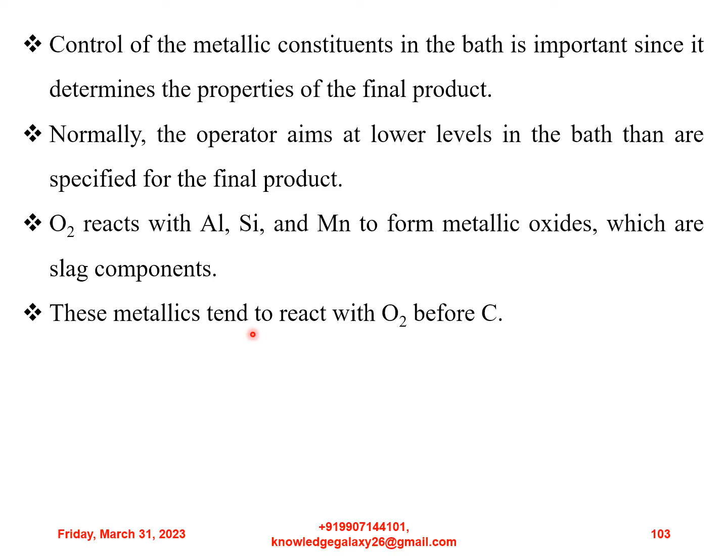Oxygen reacts with aluminium, silicon and manganese to form metallic oxides which are slag components. These metallics tend to react with oxygen before carbon. They also react with FeO, resulting in a recovery of iron units to the bath. For example, Mn plus FeO gives MnO plus Fe. Manganese is typically lowered to around 0.06% in the bath.

The reaction of carbon with oxygen in the bath to produce carbon monoxide is important since it supplies a less expensive form of energy to the bath and performs several important refining reactions. In present day electric arc furnace operations, the combination of oxygen with carbon can supply between 30 to 40% of the net heat input to the furnace.

Evolution of CO is very important for slag foaming. Coupled with a basic slag, CO bubbles are trapped in the slag, causing it to foam and helping to bury the arc. This gives greatly improved thermal efficiency and allows the furnace to operate at high arc voltages even after a flat bath has been achieved.

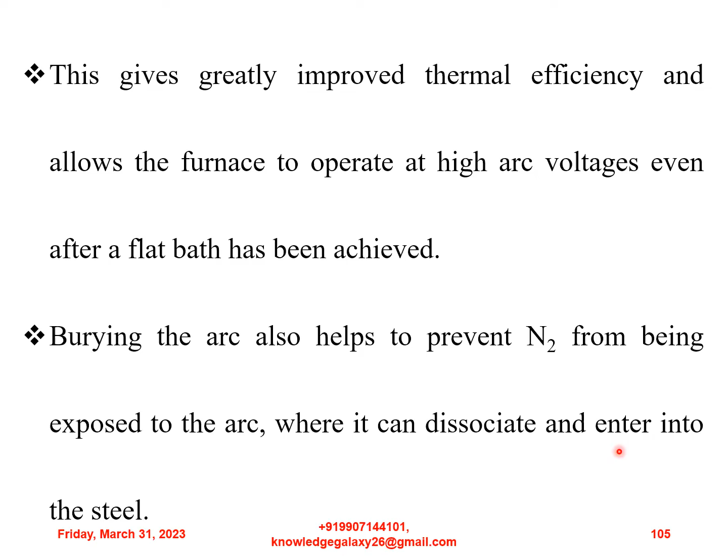Burying the arc also helps to prevent nitrogen from being exposed to the arc where it can dissociate and enter into the steel. If the carbon monoxide is evolved within the steel bath, it helps to strip nitrogen and hydrogen from the steel.

Nitrogen levels in steel as low as 50 ppm, that is parts per million, can be achieved in the furnace prior to tapping. Bottom tapping is beneficial for maintaining low nitrogen levels since tapping is fast and a tight tap stream is maintained. A high oxygen potential in the steel is beneficial for low nitrogen levels, and the heat is to be tapped open as opposed to blocking the heat.

At 1600 degrees Celsius, the maximum solubility of nitrogen in pure iron is 450 ppm. Typically, the nitrogen levels in the steel following tapping range from 80 ppm to 100 ppm.

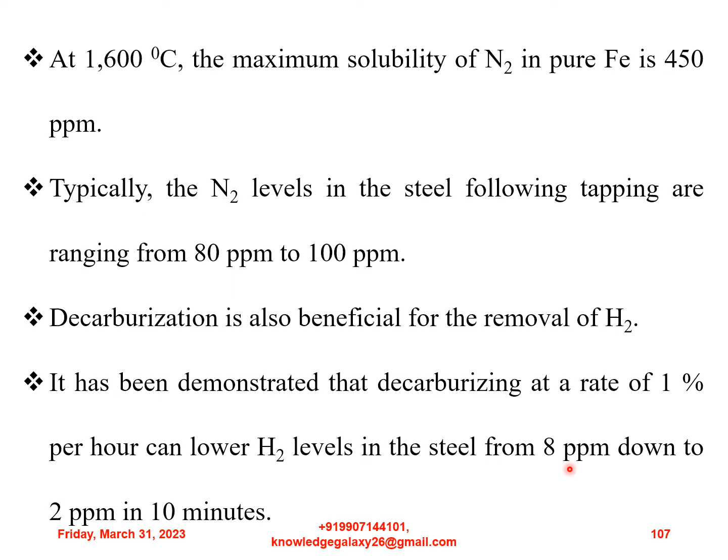Decarburization is also beneficial for the removal of hydrogen. It has been demonstrated that decarburizing at a rate of 1% per hour can lower hydrogen levels in the steel from 8 ppm down to 2 ppm in 10 minutes.

At the end of refining, a bath temperature measurement and a bath sample are taken. If the temperature is too low, power can be applied to the bath. This is not a big concern in present day steel melting shops, where temperature adjustment is carried out in the ladle furnace.

For most steel making operations, refining in the electric arc furnace is limited to dephosphorization, decarburization, and temperature adjustment. Phosphorus in the charge can be at higher than usual levels for DRI and HBI, pig iron, and hot metal, depending on the iron ore source. Some steels require particularly low phosphorus levels to avoid too high ductile or brittle transition temperatures, or temper embrittlement.

From the equilibrium point of view, lower temperatures, high slag basicity, and high oxidation of the bath favor dephosphorization. My dear friends, the conditions favoring dephosphorization are lower temperatures, high slag basicity, and high oxidation of the bath. Please note it down.

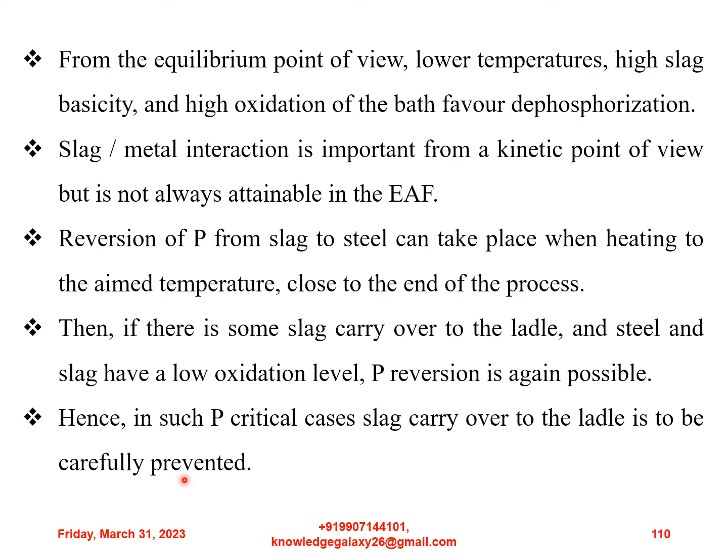This can be done by slag detection, slag stopping system, or by EBT, that is eccentric bottom tapping, which is stopped before the end of the steel.

In such a hot heat practice, a considerable fraction of liquid steel is left in the furnace for the next heat. Hot heat practice not only prevents steel from rephosphorization but also speeds up the melting process. However, it has a smaller charge weight in the ladle as a drawback.

The refining step normally does not need full power, which with an already flat bath can be dangerous for the lining. At that time, the foaming of the slag is a must. For the slag to foam, the production of CO gas is necessary by means of injection of carbon and oxygen through lances or burners.

For foaming purposes, several carbonaceous materials are useful depending on local cost and availability. These are anthracite, petroleum coke, and coke breeze, which I have already mentioned earlier in the presentation. I hope you remember that.

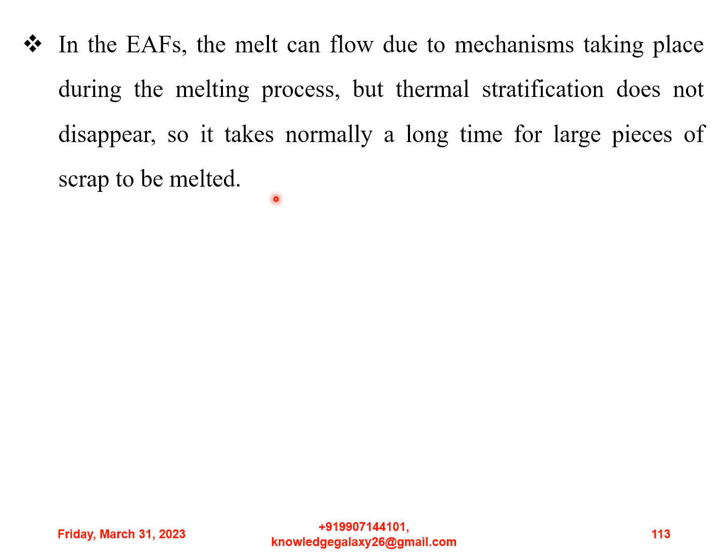Concentration gradient in the bath has also been reported, which causes the reaction rates in the bath to decrease, and also the reactions do not take place uniformly in all parts of the bath.

Thermal stratification is a more common problem in ultra high power furnaces where there is high superheat. Hence, it is important that the melt dripping down from the top is convected to reduce stratification. These are some important practical aspects dealt with in day-to-day furnace operations. I have put them here for your reference and consideration, as I think it is good information.

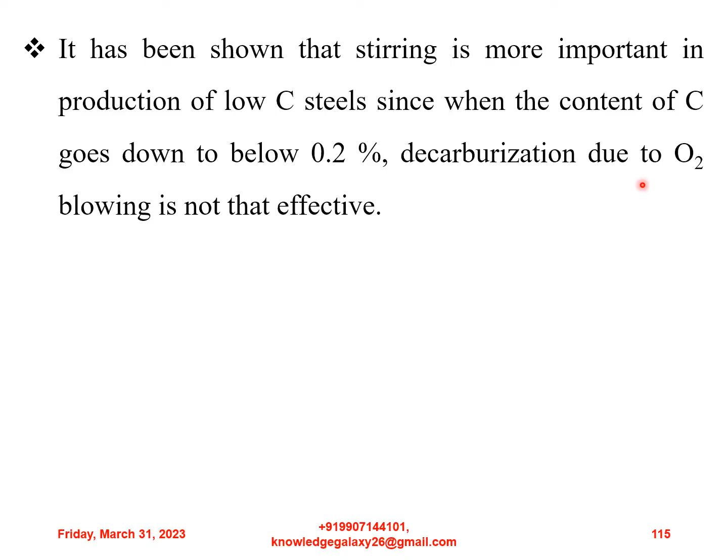It has been shown that stirring is more important in production of low carbon steels, since when carbon content goes below 0.2%, decarburization due to oxygen blowing is not that effective. Hence, a powerful driving force is needed to transfer carbon to the reaction zone where oxygen is blowing. In forced convection, an external driving force is used to make the fluid flow, and the magnitude of velocity and rate of heat transfer increase compared to natural convection.

CO bubbles formed during formation of the foaming slag contribute to bath circulation, but an additional amount of gas can be injected into the bath to increase the intensity of bath stirring. Inert gas like nitrogen, argon, or a mixture of both can be injected through tuyeres or porous plugs submerged within the bottom refractory of the furnace. The number of tuyeres or plugs used depends on their size as well as the size of the furnace. The blowing is normally done at a low intensity of 0.1 cubic meter per ton minute.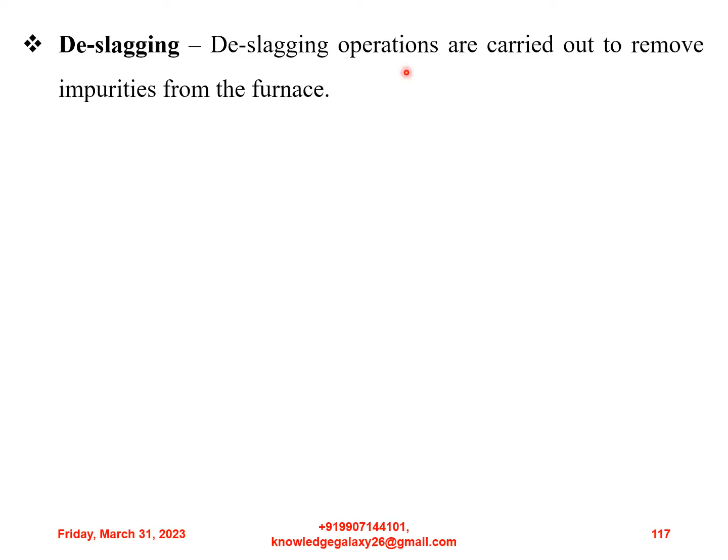Next phase is deslagging. Deslagging operations are carried out to remove impurities from the furnace. During the melting stage and refining operation, some undesirable materials within the bath are oxidized and enter the slag phase. It is advantageous to remove as much phosphorus into the slag as early in the heat as possible, that is, while the bath temperature is still very low. I hope you remember that I already described this in detail in the previous slides.

The furnace is tilted backwards and slag is poured out through the slag door. Removal of the slag eliminates the possibility of phosphorus reversion.

During slag foaming operations, carbon can be injected into the slag where it reduces FeO to metallic iron and in the process produces CO, which helps foam the slag. If the high phosphorus slag has not been removed prior to this operation, phosphorus reversion occurs. During slag foaming, slag can overflow the sill level in the EAF and flow out of the slag door.

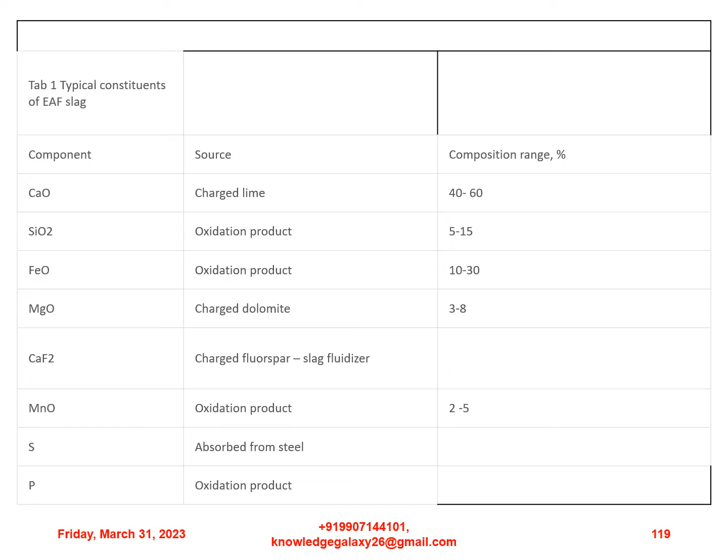Okay, moving ahead. So far so good. So the next operation is tapping.

Once the desired steel composition and temperature are achieved in the furnace, the tap hole is opened for tapping the heat. Tapping can either be through a spout or through a tap hole positioned at the bottom of the furnace. In case of spout tapping, the furnace is tilted and the steel pours into a ladle for transfer to the next batch operation, normally a ladle furnace.

During the tapping process, bulk alloy additions are made based on the bath analysis and the desired steel grade. Deoxidizers can be added to the steel to lower the oxygen content prior to further processing. This is normally referred to as blocking the heat or killing the steel. Common deoxidizers are silicon in the form of ferrosilicon or silicomanganese, and aluminium.

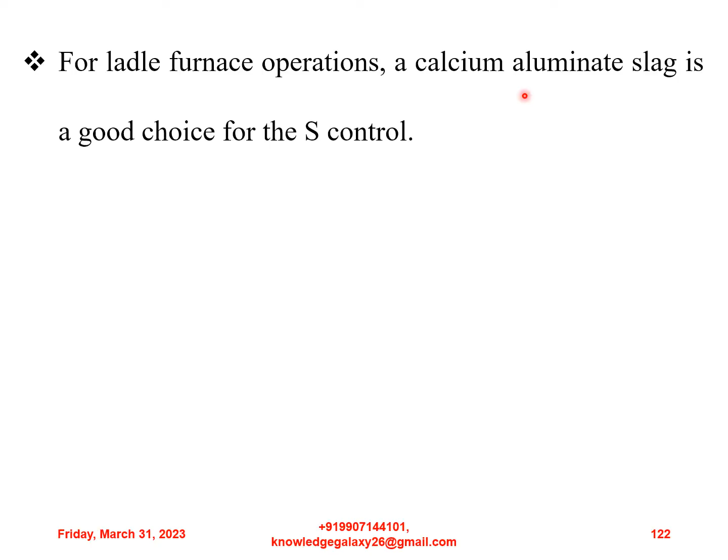Majority of carbon steel operations aim for minimal slag carryover. A new slag cover is built during tapping. For ladle furnace operations, calcium aluminate slag is a good choice for sulfur control. Slag forming compounds are added in the ladle at tapping so that a slag cover is formed prior to transfer to the ladle furnace. Additional slag materials can be added at the ladle furnace if the slag cover is insufficient.

Next, last but not the least of the steps is furnace turnaround. Furnace turnaround is the period following completion of tapping until the furnace is recharged for the next heat. During this period, the electrodes and roof are raised and the furnace lining is inspected for refractory damage. If necessary, repairs are made to the hearth, slag line, tap hole and spout. In the case of a bottom tapping furnace, the tap hole is filled with sand.

My dear friends, I hope you can understand and conceptualize that hot repairs are done while the furnace is in hot condition, and during this furnace turnaround time, these are normally called patching work, so that the furnace doesn't get deteriorated and the refractory lining is repaired while the furnace is hot.

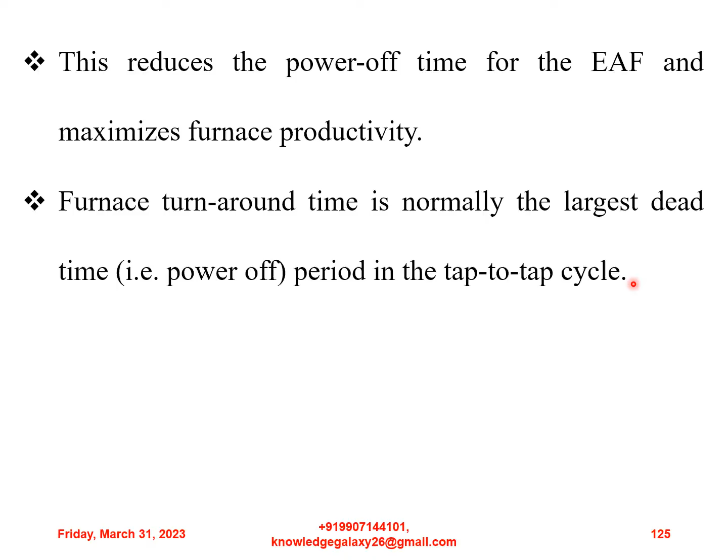This reduces the power-off time for the electric arc furnace and maximizes furnace productivity. Furnace turnaround time is normally the largest dead time, that is power-off time period, in the tap-to-tap cycle. So we must always try to keep the furnace turnaround time as low as possible. With advances in furnace practices, this has been reduced from 20 minutes to less than 5 minutes in some newer installations.

So now let us discuss the chemical reactions in the electric arc furnace steel making technology. During and after the meltdown of raw materials, several compounds and elements begin to react with each other. In order to reach the required quantities of the respective elements in the steel, the reaction processes are facilitated by injection of carbon and oxygen through the lances.

By injecting oxygen into the steel phase and carbon into the slag phase, CO bubbles are formed and a foaming slag is created. One of the oxide reactions forms CO gas, which is especially important for the formation of a foaming slag.

Carbon injection into the slag phase through the lances creates CO bubbles through a reaction with oxygen. These bubbles then help to cause the slag to foam. A foaming slag protects the liquid steel from reacting with the atmosphere and also increases electrical efficiency by burying the arc from the electrodes.

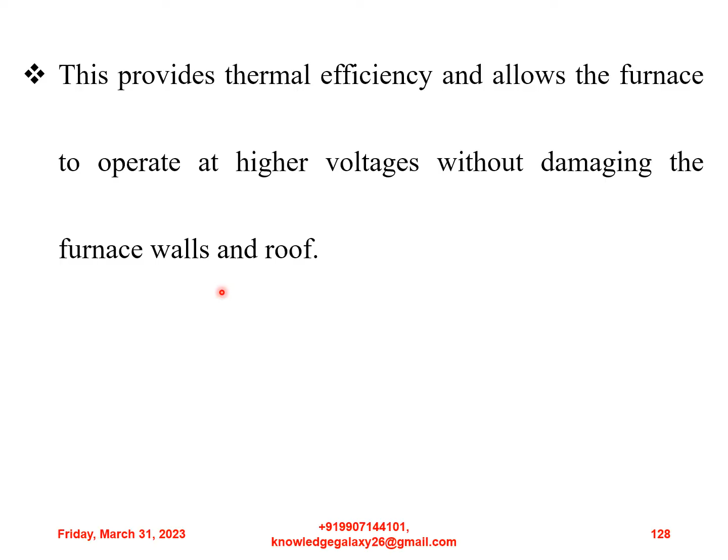This provides thermal efficiency and allows the furnace to operate at higher voltages without damaging the furnace walls and roofs. Burying the arc also helps to prevent nitrogen from being exposed to the arc where it can dissociate and enter into the steel.

Due to the high affinity of oxygen to elements such as aluminium, silicon, chromium, carbon, phosphorus and iron, metallic oxides are easily formed, and because of their relatively low density, these float up to the slag phase. All of these reactions are exothermic, that is, they provide heat to the system and hence supply additional energy for melting and heating the scrap.

The thermodynamics and kinetics of the process assume that the reaction which provides the lowest dissolved oxygen content controls the desired oxygen activity in the steel.

The reactions that are highly exothermic are: first, 2Al plus 3O gives Al2O3. Next is C plus O, this gives CO. Third one is 2Cr plus 3O, this gives Cr2O3. Next is Fe plus O, this gives FeO. And Si plus 2O, this gives SiO2. All these reactions are exothermic in nature, as I have described earlier.

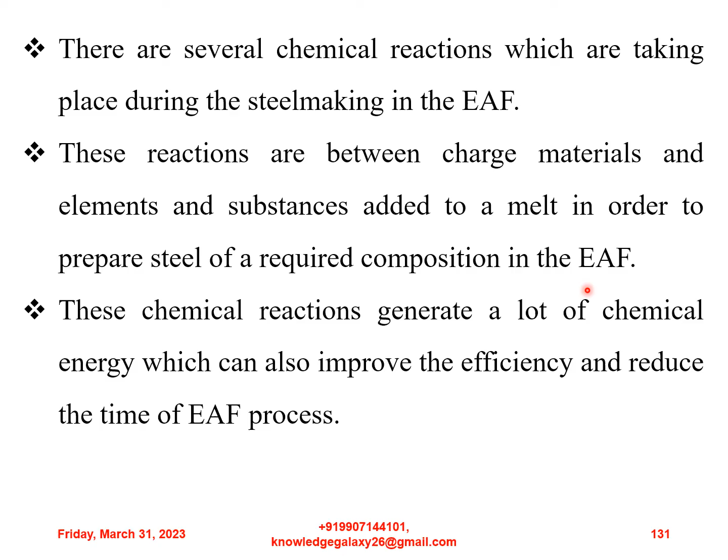There are several chemical reactions taking place during steel making in the electric arc furnace. These reactions are between charge materials and elements and substances added to a melt in order to prepare steel of a required composition in the electric arc furnace. These chemical reactions generate a lot of chemical energy, which can also improve efficiency and reduce the time of the electric arc furnace process.

In electric arc furnaces, chemical reactions can affect the temperature of the steel, which is one of the most important factors for steel making. The chemical reactions taking place in the electric arc furnace can be grouped into four categories, namely: first, chemical reactions of scrap components; second, chemical reactions proceeding on adding fluxes; third, chemical reactions during deoxidation; and fourth, chemical reactions with alloy additions.

Now first consider the chemical reactions of scrap components. The chemical reactions of scrap components are listed below. First one is 2Fe plus 3O, this gives Fe2O3. Next, Fe plus O, this gives FeO. C plus O, this gives CO. Si plus 2O, this gives SiO2. Mn plus O gives MnO. 2P plus 5O gives P2O5. And 2Cr plus 3O gives Cr2O3.

Next group is chemical reactions proceeding on adding fluxes. First, CaO plus S gives CaS plus O. Next, CaCO3 dissociates into CaO plus CO2. Next, MgCO3 dissociates into MgO plus CO2. And next, 2Al plus 3O gives Al2O3.

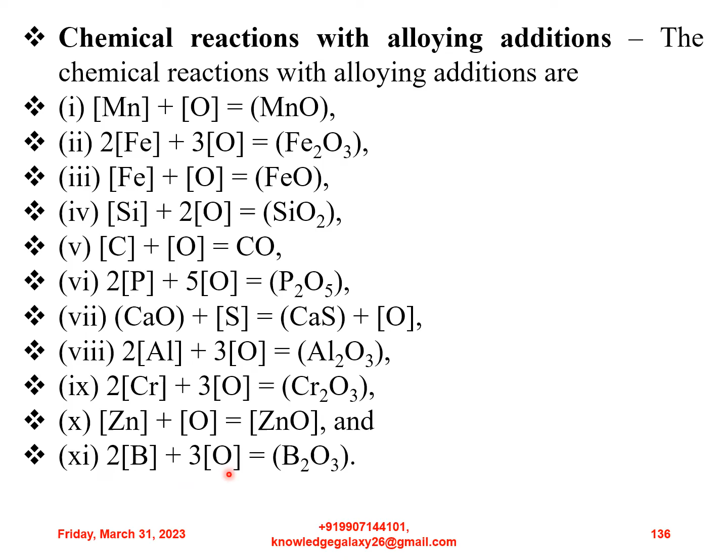Chemical energy is very important for melting steel in an electric arc furnace. Energy of exothermic reactions is a secondary energy source. However, these forms of energy are basic in an electric arc furnace. Electrical energy comprises around 60% of the overall expenditure, and chemical energy around 30% of the energy required. The balance energy comes from the input through oxy-fuel burners.

Chemical energy is introduced by oxygen, carbonaceous materials, and fuel gases, more and more through injectors rather than lances. The energy generating reactions are: C plus half O2 gives CO, generating 2.55 kWh per kg of carbon. C plus O2 gives CO2, generating 9.1 kWh per kg of carbon. CO plus half O2 gives CO2, generating 2.81 kWh per kg of carbon. And Fe plus half O2 gives FeO, generating 1.32 kWh per kg of iron.

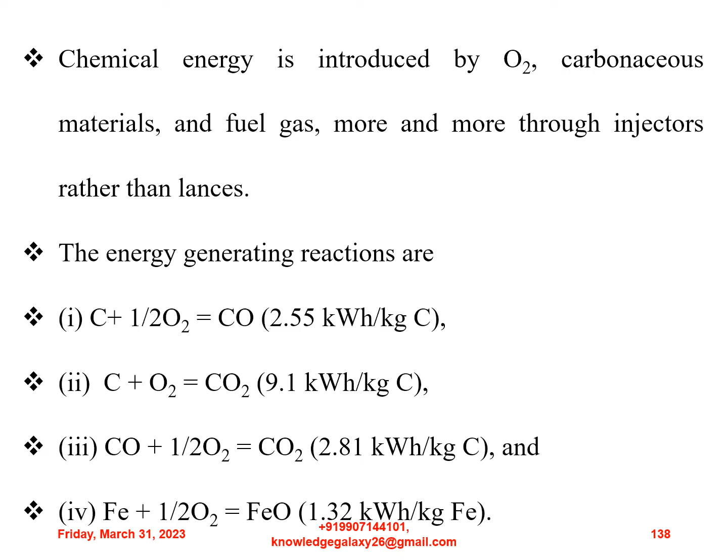I hope these reactions are very clear to you all and you don't have any problem understanding them.

Certain grades of steel, such as those used for gas and oil pipelines, need very low levels of sulfur to provide better welding and forming properties.

Desulfurization is driven by an exchange of sulfur between the liquid steel and the slag. The reactions which take place are governed by the dissolved content of aluminium and sulfur in the steel, and the content of CaO, Al2O3, and calcium sulfide (CaS) in the slag.

Normally this is described by the reaction 3CaO plus 2Al plus 3S gives 3CaS plus Al2O3. In practice, desulfurization in the electric arc furnace is achieved by first adding a synthetic CaO-based desulfurizing slag at furnace tapping, and next, aluminium deoxidizing the steel to very low oxygen activity. Otherwise, the aluminium reacts preferentially with oxygen.

Now let us discuss the very important role of slag. It is very important to learn and know about the role of slag. Very important, so let us discuss.

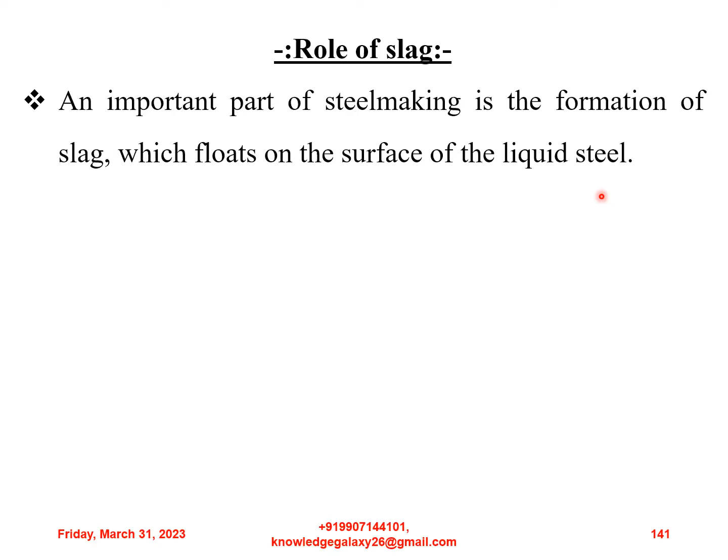Slag normally consists of metal oxides and acts as a destination for oxidized impurities. Protection of cooling panels and refractories, arc stability, dephosphorization, thermal insulation, and heat transfer are some of the expected tasks for the slag.

The main slag formers in the electric arc furnace are lime, calcined dolomite, oxides in scrap, gangue in DRI, oxidation products from metallic charge, ash of carbonaceous additions, MgO picked up from refractories, as well as the slag remaining from the previous heat. So these are the main sources of slag formers.

Some plants recycle scale or other waste, hence adding to the slag. The main EAF slag components are CaO, SiO2, FeO, and MgO, and other components are Al2O3, MnO, and P2O5.

The majority of electric arc furnaces use basic refractories, and as a result, it is necessary to maintain a basic slag in the furnace in order to minimize refractory consumption.

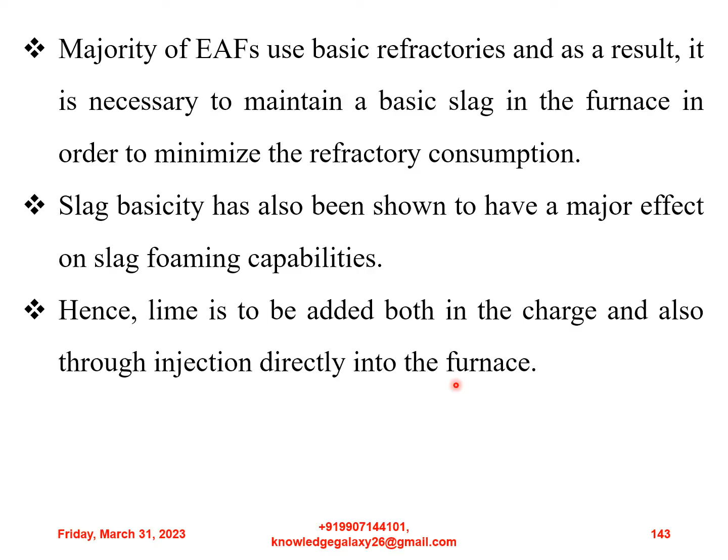Slag basicity has also been shown to have a major effect on slag foaming capabilities. Hence, lime is to be added both in the charge and also through injection directly into the furnace. Lime addition practices can vary greatly due to the variations in scrap composition.

As elements in the bath are oxidized, example phosphorus, aluminium, silicon, manganese, etc., they contribute acidic components to the slag. Hence, basic slag components are to be added to offset these acidic contributions. If silica levels in the slag are allowed to get too high, considerable refractory erosion results. In addition, FeO levels in the slag increase since FeO has greater solubility in higher SiO2 slags. This can lead to higher yield losses in the electric arc furnace.

The generation of slag also allows these materials which have been stripped from the bath to be removed from the steel by pouring slag out of the furnace through the slag door which is located at the back of the electric arc furnace. This is known as deslagging or slagging off. If the slag is not removed but is instead allowed to carry over to the ladle, it is possible for slag reversion to take place.

This occurs when metallic oxides are reduced out of the slag by a more reactive metallic present in the steel. When steel is tapped, it is frequently killed by adding either silicon or aluminium during tapping. The purpose of these additions is to lower the oxygen content in the steel. If, however, P2O5 is carried over into the ladle, it is possible that it reacts with the alloy additions, producing SiO2 or Al2O3 and phosphorus, which goes back into solution in the steel.

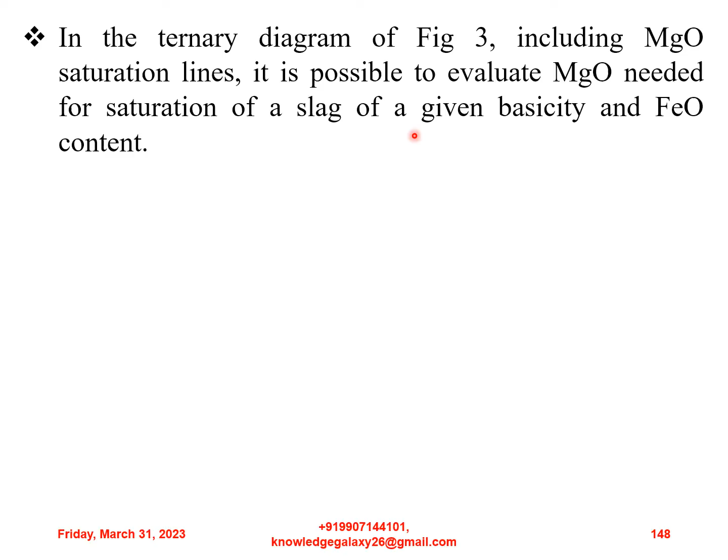Sometimes magnesium lime is added to the furnace either purely as MgO or as a mixture of MgO and CaO. Basic refractories are predominantly MgO, hence by adding a small quantity of MgO to the furnace, the slag can quickly become saturated with MgO and hence less refractory erosion is likely to take place. In the ternary diagram shown in the next slide, including MgO saturation lines, it is possible to evaluate MgO needed for saturation of a slag of a given basicity and FeO content.

Control of foaming slag remains a matter of continuous development. Majority of the electric arc furnaces incorporate tools to evaluate slag foaming based on noise, vibration and harmonics. In majority of cases, this is used as an offline help for the furnace operator. But some electric arc furnaces have recently introduced online control of the carbon and oxygen injection for slag foaming based on the mentioned measurements.

Let's move on. A mass balance based on the chemistry and weight of slag formers is helpful for comparison with measured chemistry, for a better understanding of attack on refractory linings, fines lost to the exhaust gas, incidence of changes in weight, chemistry of additions, etc. For foaming purposes, it is important to maintain slag basicity, that is percentage of CaO divided by percentage of SiO2, between 1.2 to 2.5. To decrease the need of MgO for slag saturation, slag basicity is to be maintained at least to 2.